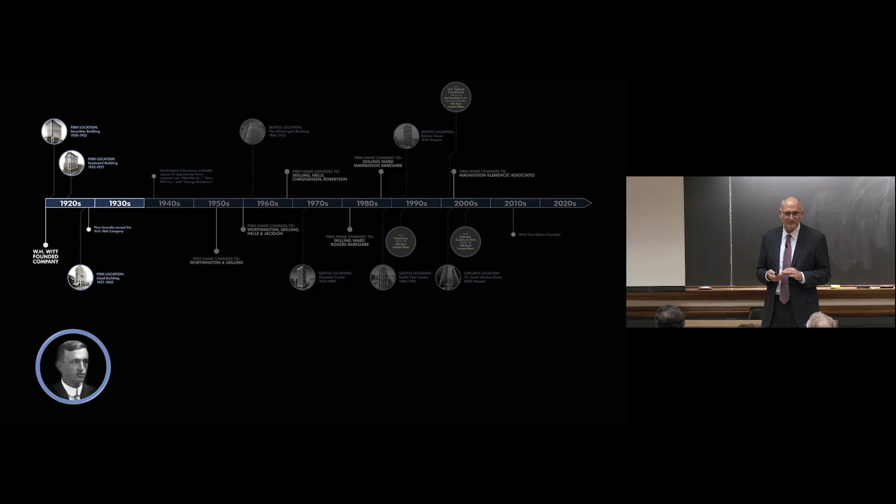A little bit of history, because I always think it's good to know history. When I was an undergraduate student, I got a minor in history because I thought history really teaches us good lessons. In my case, our company started in 1920 by a guy named William Witt, who was a structural engineering graduate of the University of Wisconsin. He migrated from Wisconsin to Seattle and established a company in 1920.

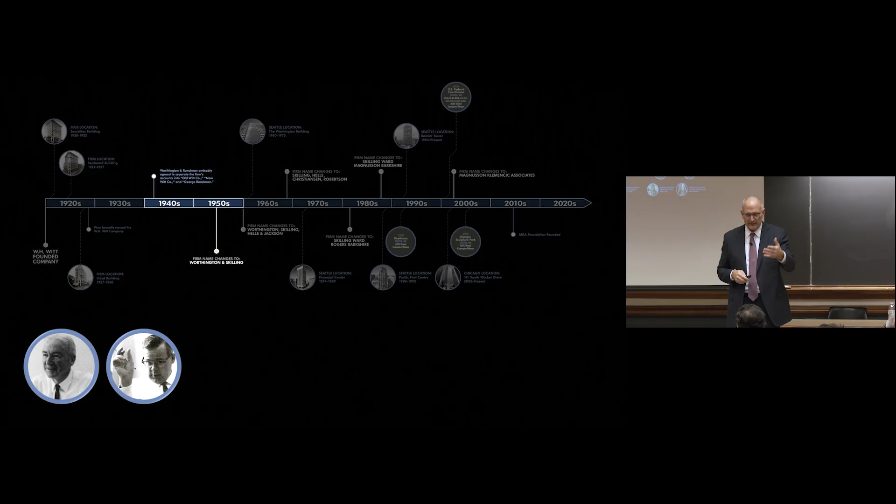He did a bunch of local buildings in the Seattle area and the Washington, northwest region of the US. In the 1940s and 50s, along came a guy named John Skilling. John Skilling is really the individual who laid the groundwork for our firm and really launched us into kind of what we are today. Most importantly, John Skilling's good friend and classmate at the University of Washington was Minoru Yamasaki. This is the beginning of that trust and that caring and that relationship between an architect and an engineer.

We'll talk about that a little bit more, but in the 50s they were doing a lot of thin shell concrete construction. And then along came in the 60s and 70s some really brilliant engineers that joined the company, in particular Jack Christiansen, who was a savant in concrete design, and Les Robertson, who's an absolutely brilliant structural engineer. They did all kinds of miraculous things in the 60s and 70s.

The World Trade Center towers in New York, the first diagrid building in Pittsburgh, the Federal Reserve Bank in Minneapolis - all across the country starting to work on these miraculous projects. A lot of it was an outgrowth of John Skilling and Minoru Yamasaki's friendship, and that trust and that collaboration.

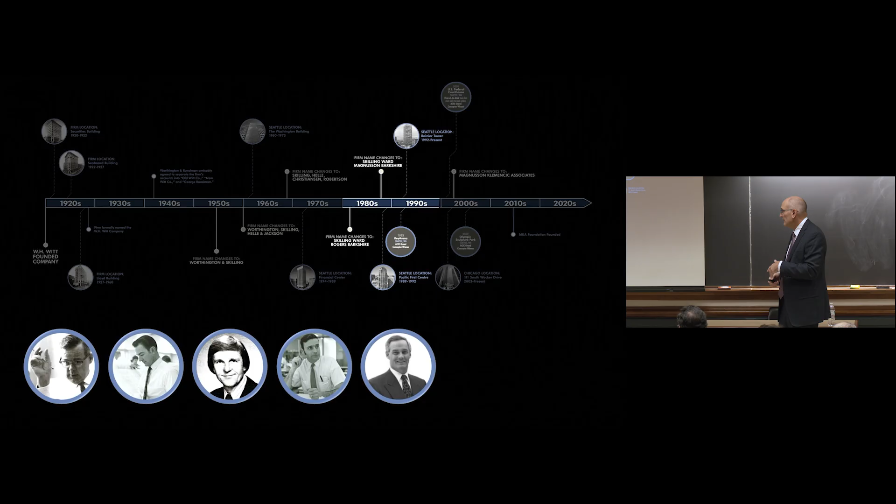And then along came a guy named John Magnusson in the early 80s. John led us into a new era of modern construction, modern buildings, composite construction, all kinds of new technology. And then around 2000, I came along, and here we are today. So that's our company history, but rooted in that, all the way back to the 1950s and 60s, was this relationship between the architect and the engineer and this collaboration.

So here's a building I want to highlight very briefly because it sets the table for things to come. This is a building that John Skilling and Minoru Yamasaki did together in Seattle. It happens to be where our offices are located, the Rainier Tower in Seattle. The idea Yama had was he wanted to take this building and raise it 12 stories in the air, because that got the building above all the surrounding buildings - at the time they were only 12 stories tall - and everyone would have a view of the water, which is a big deal in Seattle.

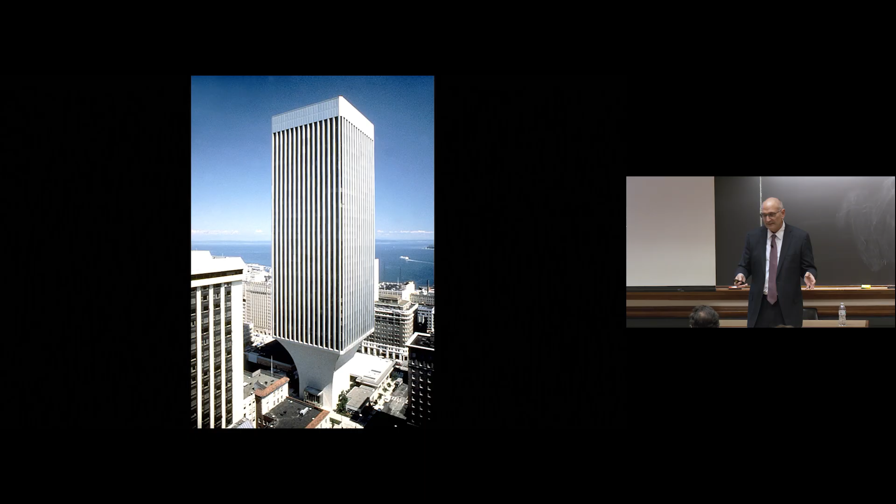And so we went to Skilling and said, well, how do we do that? Skilling came up with a couple of ideas, but ultimately they settled on this one, I'll call it the Rock of Gibraltar. Some people call it the golf tee. But put the building on a 12-story tall concrete pedestal, which is what the design ended up being. And what people don't really realize is above that Rock of Gibraltar is a very light steel structure, a steel moment frame structure that exists on top of it. At that time in the 1970s, that was a particular, popular way to go about designing the structure of tall buildings. We just happened to put it 12 stories in the air on top of this pedestal. But that was the kind of makings of that collaboration between the two.

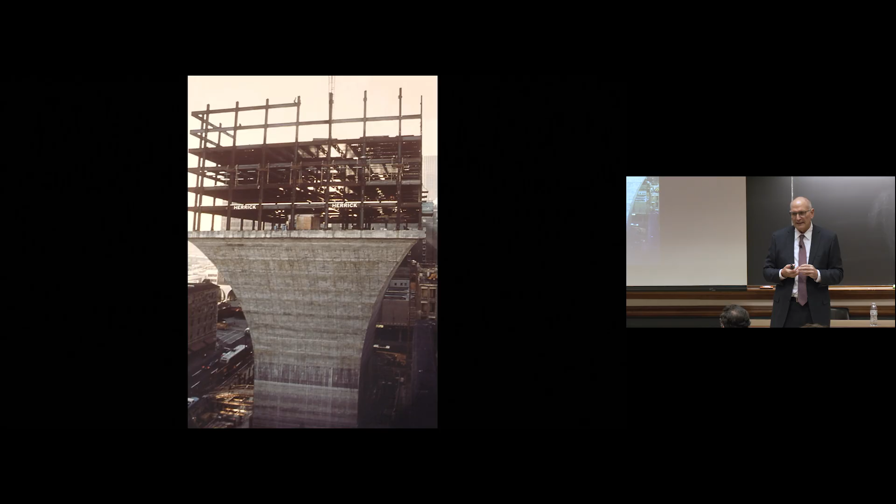I got the pleasure of actually working with John early in my career, and I asked him about this particular building. I said, you know, that was brilliant, this idea that you guys came up with. And he smiled and laughed. I said, what did you think about that? He said, well, yeah, I let Yama think it was his idea. Anyway, there it is under construction.

Well, that laid the groundwork for then almost 35, 40 years later, we got a call from John Buck in Chicago. Mr. Buck wanted us to design a building, which ultimately ended up being 111 South Wacker. But that was the beginnings of a relationship for me personally with Jim Goettsch.

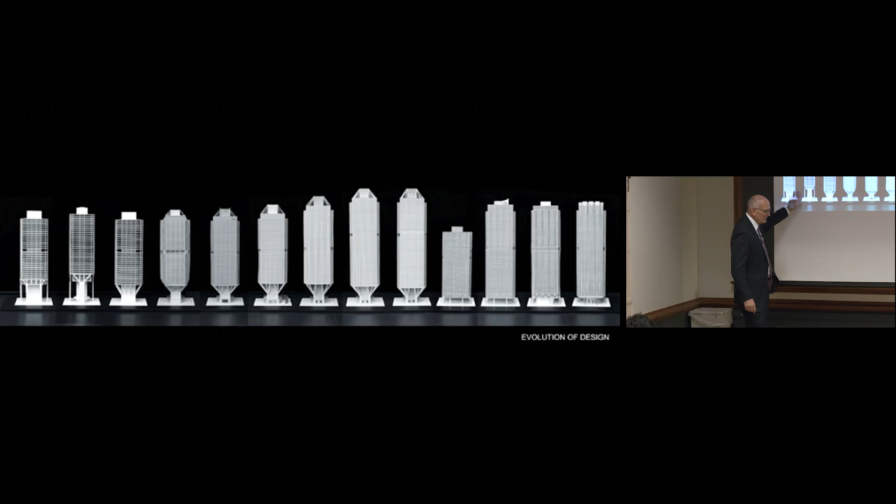And the idea back then was similar. Surrounding that site were buildings that were about 15 stories tall. So the first ideas that Jim and I came up with were, well, how do we raise the building 15 stories in the air? Jim came up with these first few models. And I said, well, wait a minute, we've already built this building. It exists in Seattle. We made it out of concrete, but this is Chicago. We need to make it out of steel. How do we do that?

So we started toying around with these kind of tree column ideas, these sloping columns. This is where Jim and I really kind of launched into our collaboration of how to best do a version of Rainier Square in Chicago, not in concrete, but in steel. And so we went along developing these different ideas until we got to here. The building had grown in height and gotten more bold, and the market was good.

And then right here, something happened, and the something was 9/11. So at that moment, the world stopped. In fact, many said there'll never be a high-rise building built ever again.

But about a year went by, and the phone rang again, and Buck said, okay, it's time to go again. But I can't build this building because that's too scary to people. You need to come up with something else. So the idea was, well, how do we still achieve that raise of the building, but have it appear less frightening to a public that was freaked out about tall buildings?

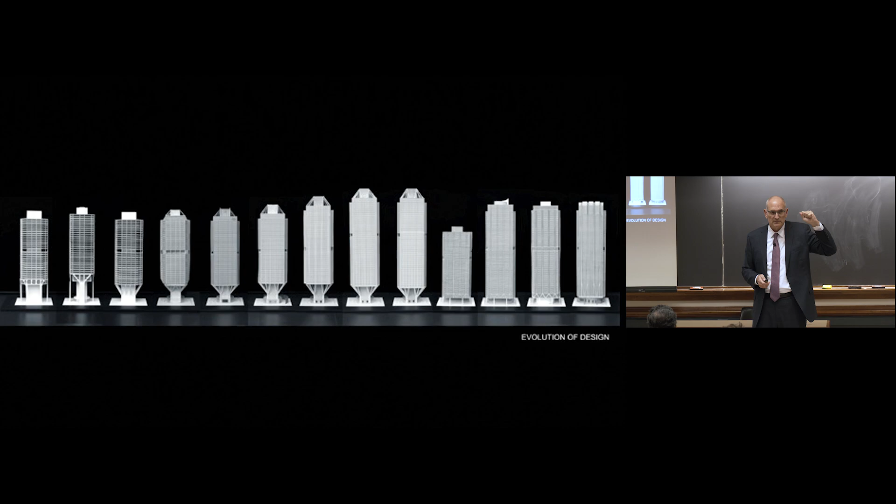So what we came up with ultimately is what we built on the right there. What you don't see is in these floors that used to be air, those floors now are actually all parking. So the first usable floor of that building is still at level 12, where people are actually residing in their offices, and everything below that is parking. The whole design response to the public sentiment at the time was we need to make it look more safe. How do we do it?

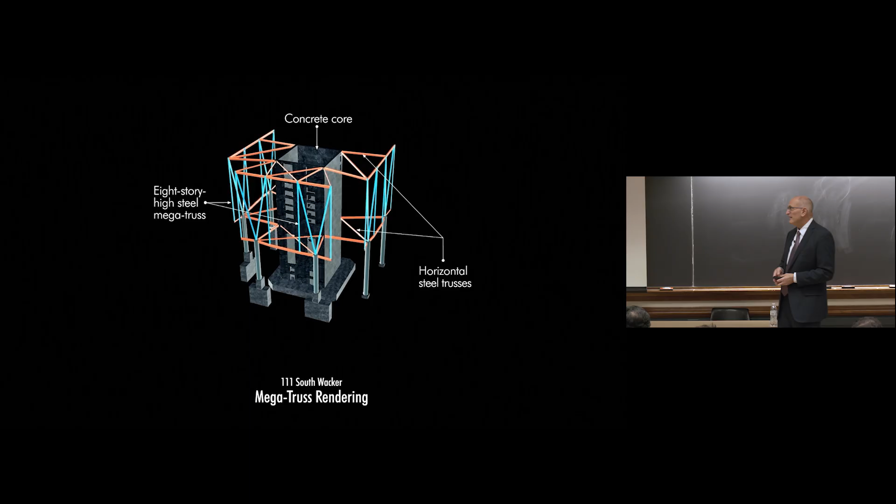Anyway, to the engineering, how we did the engineering was fairly simple. On each side of the building, there's 2 columns that touch the ground. On top of those columns that stand up about 80 feet in the air, there's this V column that goes up and splits out and grabs 2 more columns above. So we traded 2 columns above for 1 column below so that we touch the ground more delicately.

And here it is when we're building it. How you build these things becomes equally important to how you design them. So that collaboration then extends to the contractor. How are we going to actually make this? And so how this works, you see, here's one of those big columns that touches the ground, goes to here and splits into the V.

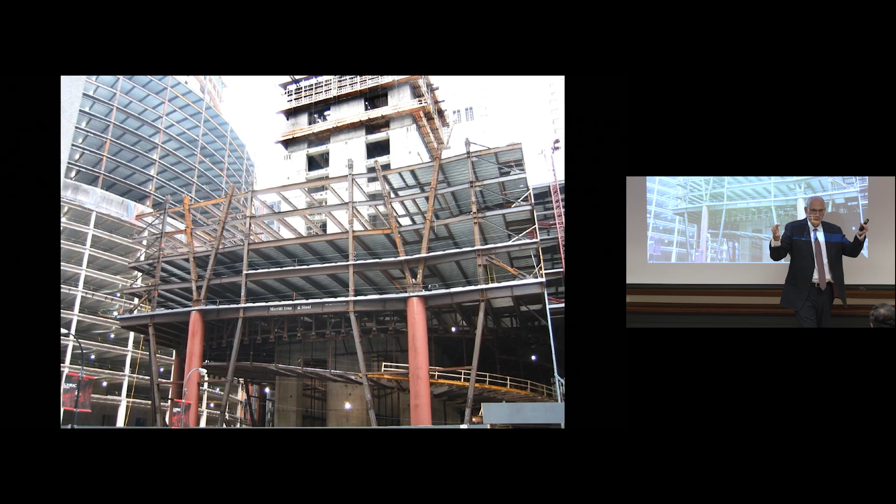The V goes all the way up to a point where it grabs a node, and then this column here is actually hanging from the top of the V. This piece here and this piece here are just temporary. We put them in temporarily so that we could build the building from the bottom up until we completed the top, and then we could take the column out.

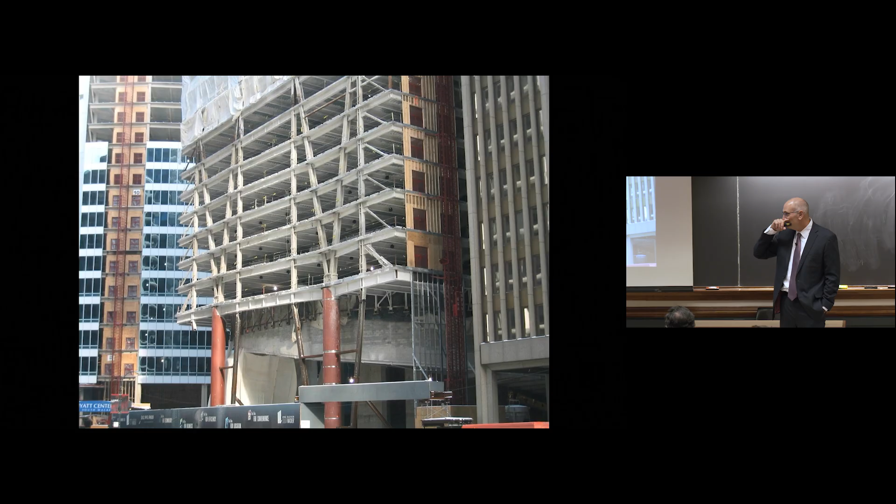So on one fateful Saturday morning, they said, Ron, come to the site and stand right there while we take that column out. This is your design. It should be safe, right? You stand there, we'll take the column out. So we did, and it worked. And it turns out to be a beautiful building.

We had this idea of raising the building up, getting up above something else, but we didn't really realize it in this building. We still ended up with these two columns on each side of the building because of the 9/11 response. But this idea was still kind of in our heads. This is another thing that happens with architects and engineers, we get on these themes, these tracks, these ideas, and until we perfect them, we'll kind of relentlessly pursue them.

So we had this idea one day about putting two towers on top of Union Station in Chicago. Union Station is a historic structure, historic architecture. You can't really touch it. But how do you take two office buildings and insert them somehow surgically through Union Station without mucking up the history of the building?

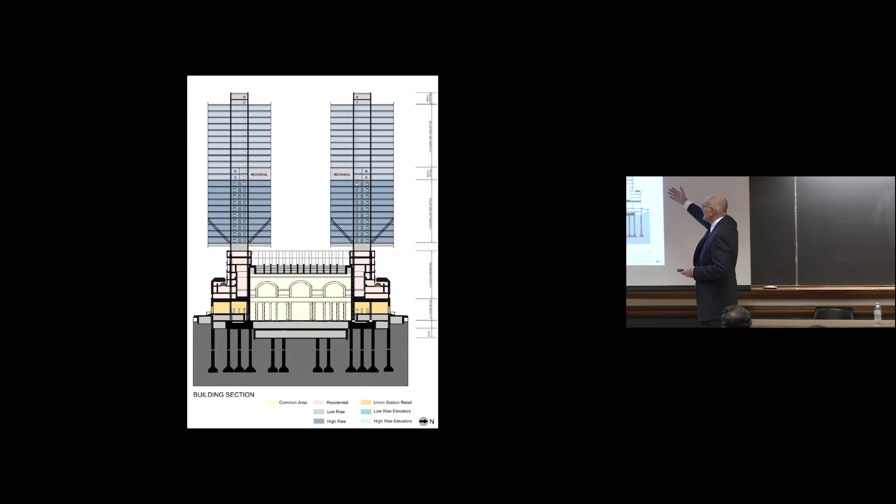So the idea was hatched again that we do something like we had thought of in the beginning. In this case, the tree column thing is buried in the building, and the building only goes through Union Station with its elevator core. No columns, nothing else would go through Union Station, just the elevator cores, because that's what needed to go there to get the people up and down. Anyway, it was a concept. We pitched it to a bunch of people. No takers. On to the next one.

So then we found some clients in Abu Dhabi. This is the Abu Dhabi Financial Center. So we actually got to build it on a smaller scale. This is kind of an experiment, but here we are. And we built it. It was only about half the size of what we had hoped, but it was actually realized in Abu Dhabi.

And then the big opportunity came: 150 North Riverside, the building right on the Chicago River. And this was not designed for what I like to use the term architectural conceit. This is architecture for a reason. And the reason was the site was right on the river.

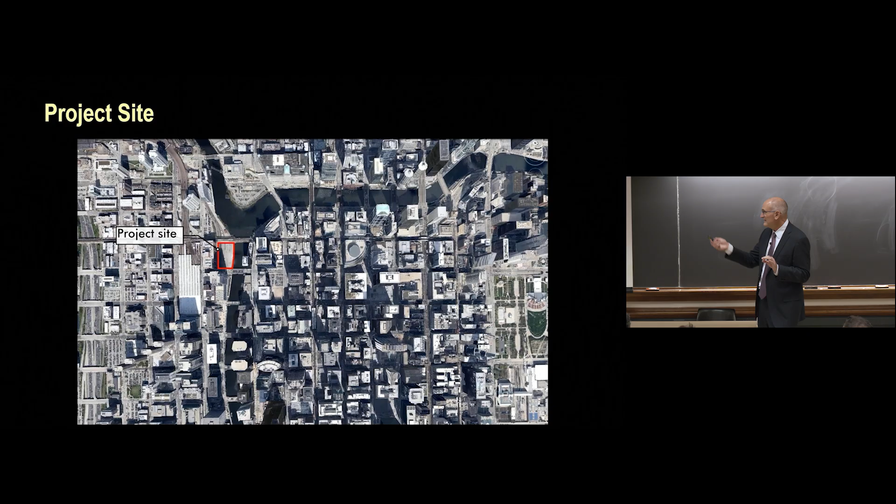It was covered with railroad tracks, and we had to put this blue shaded thing, which is the building, on top of all the inbound railroad tracks that were operating, and we couldn't touch the tracks at all. So how do you put this building that wants to be in this position over the top of all those railroad tracks without putting foundations and columns and things in the way?

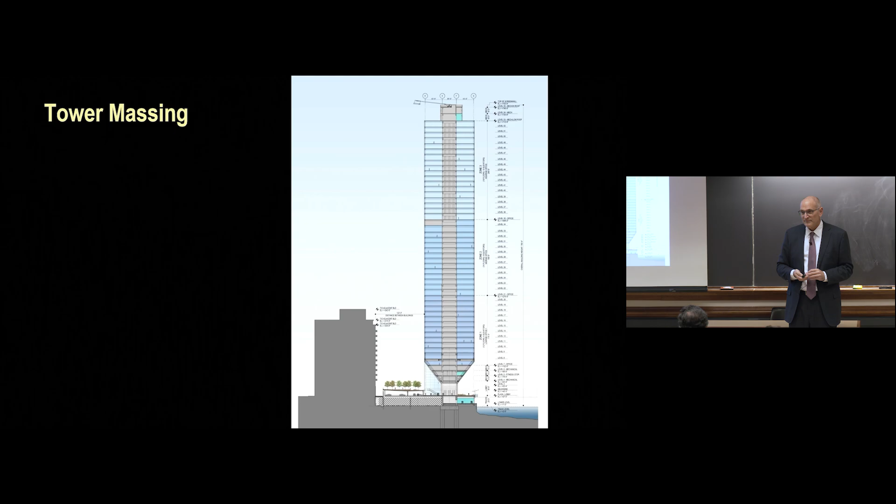So we hatched this idea again. We pulled it out of the drawer, said this is the time that we're going to live the big dream right now. So we're going to create this very tall tower, and we'll have it only touch the ground with the core. We're going back to our tree column or sloping column idea, and we're only going to touch the ground with the core.

Now, normally a building that tall, for the wind loads in Chicago, for the sway of the tower, we need to put in something engineers would call outriggers. The outrigger is a lot like the ski poles for a skier. You can imagine if you're a snow skier, if you don't have your poles and you stand on your skis, you're a little wobbly. As soon as you put your poles out here, you're a lot more stable. Same thing with a building. When you put these two columns out here and put these trusses, which are like arms reaching out to the poles, it stabilizes the building much more.

Well, if we did that here, the column, or the ski pole if you will, would be in the middle of the railroad tracks. Can't do that. And the other one would be in the river. Can't do that. Oh my goodness, now what are we going to do?

Because the client really wants to build a building this tall. The other thing that structural engineers will note is that we use this term aspect ratio. And the aspect ratio is the height of the tower divided by the width of the base.

And it's not just the width of the base, it's the width of the base of the building that braces the tower. So in this case, we were going to have this tower, something like 700 feet tall, on top of something that's only 39 feet wide. That's a 20-to-1 aspect ratio, 700 feet divided by 39 feet.

Now, if you go into a structural engineering college textbook on high-rise design, they'll tell you that the normal target aspect ratio for a good design is 8-to-1. That's kind of boring. 10-to-1, okay, I might need to think about it for a minute. 12-to-1, I might turn my computer on and actually run some analyses. 15-to-1, I've made the cover of a magazine somewhere, because that's really slender. This building was 20-to-1. Never been done before.

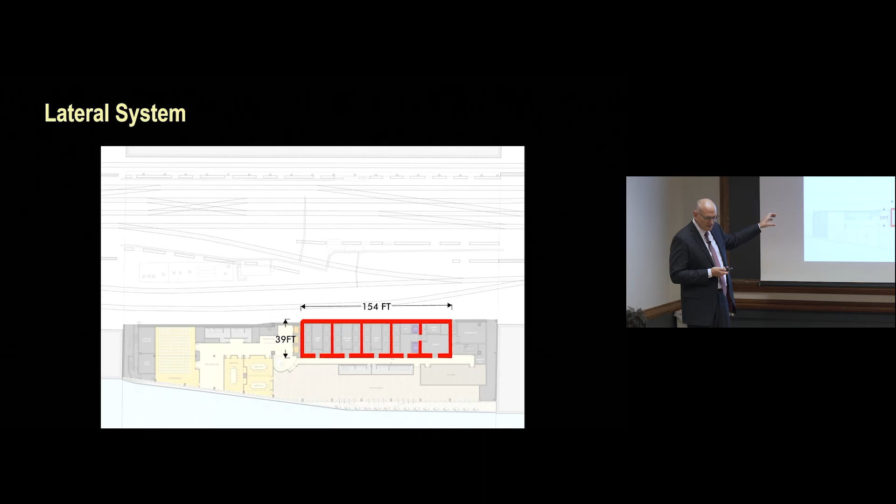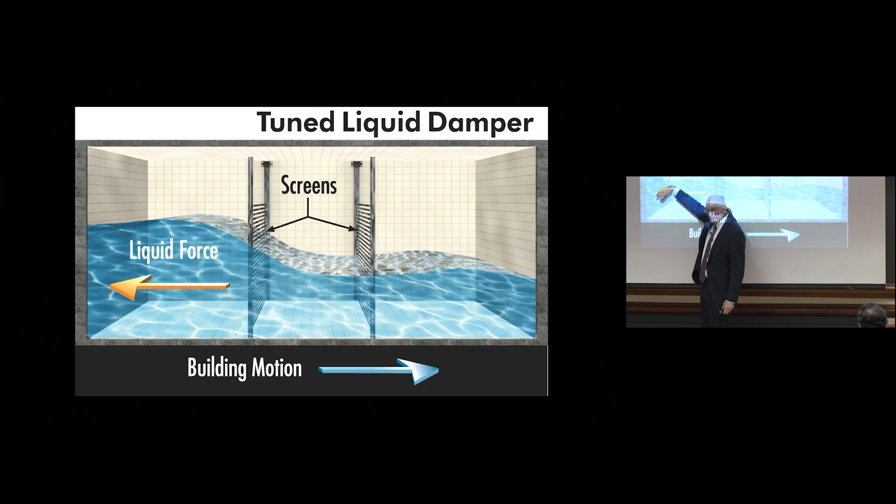In this diagram, you see something that engineers will know, we call it unbalanced hydrostatic force, meaning the water on this side of the tank is deeper than the water on this side of the tank. What that means is the force on that wall is a little bit bigger than the force on that wall. That's due to the sloshing of the water in the tank.

So the idea was if you can design the size of the tank and the amount of water in the tank so that as it sloshes back and forth, it counteracts the natural sway of the building. So they kind of go like this, they cancel each other out and the building rests very quietly. It actually works.

You have a question? How much water was needed for this to happen? A lot. I don't remember the exact number, but I think it was 120,000 gallons. Not a trivial amount of water. But that's the science of it.

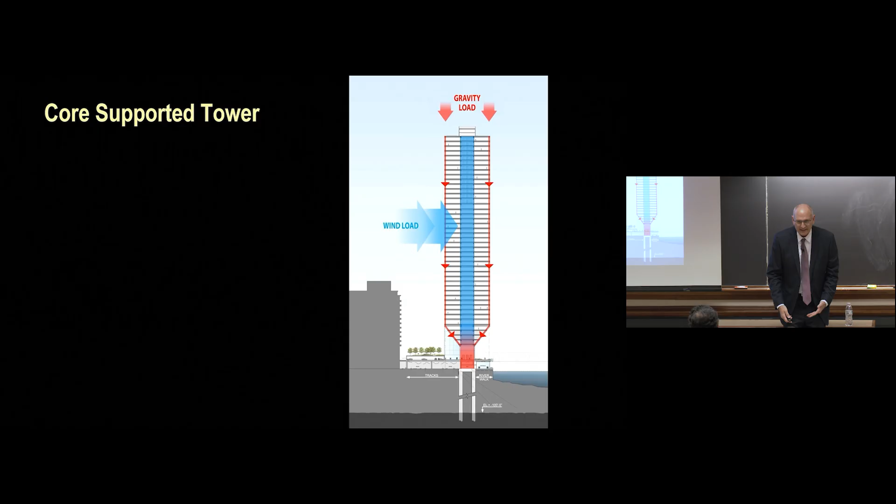The other part was, how do we manage the gravity forces in this building? Down the outside of the building are the columns, but they all need to get into the core somehow. So how we did that is we built what's amounting here to an upside down arch. Think about the St. Louis arch. Our arches are really good in compression, but they can be equally good in tension the other way with a tie. So this is a tied arch upside down. Here's what it looks like in section.

The blue things are part of the tied arch, and these are the pieces. So this is not for the faint of heart. This is where that sloping column comes into the vertical piece. And they're not small pieces, right? These aren't tinker toys we're playing with.

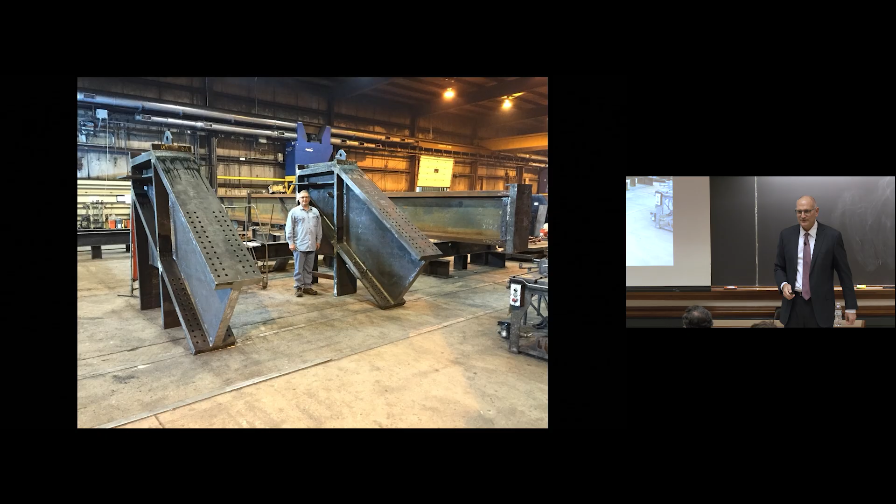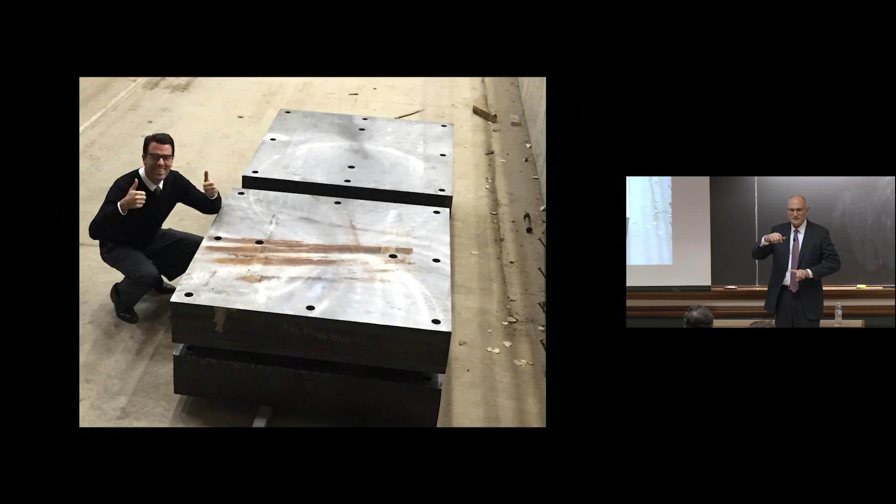These are life-size, real pieces of steel. Those are the two largest steel sections that they make in the world, and we were putting them together side by side to double them up. Very significant pieces of steel. And those are the base plates for the columns too, 12 inches thick steel base plates. So for structural engineers, this is like, love this stuff.

All right, so we built the building. It was very cool, it was very fun. They built it from a crane on the river. And that was that building.

So we're going to move on, and now we're going to talk a little bit about my friendship with Jeanne Gang. Jeanne, University of Illinois graduate, was actually contemporaries with my business partner, Dave Ekman, who runs our Chicago office. Anyway, we do a lot of work with Jeanne. She's very brilliant, and we have lots of fun together. But again, back to that trust and that caring, the architects have a big idea, the engineers have to have a big idea too, to complement it. That's where the magic comes.

All right, so here's the Aqua building in Chicago. There's Jeanne in her office, she gets down and dirty, man, she's climbing around the furniture. In this case, you see the first of about 500 strings that she strung from that building. And the idea, one of the ideas was she wanted people in the building that when they're on their balcony, they all have a great view.

They can see around the adjacent buildings. So a lot of why the building's shaped the way it is, where it's further out, where it's less far out, is influenced by the views around all the adjacent buildings, as she discovered when she was with her strings in her studio. That was in her backyard. We built a big model. And this is me toying with my own models.

So the big idea was we wanted this crazy squiggly slab edge. So you're looking in plan view at a floor. Every slab edge for 80 some odd stories is different. Every edge is different.

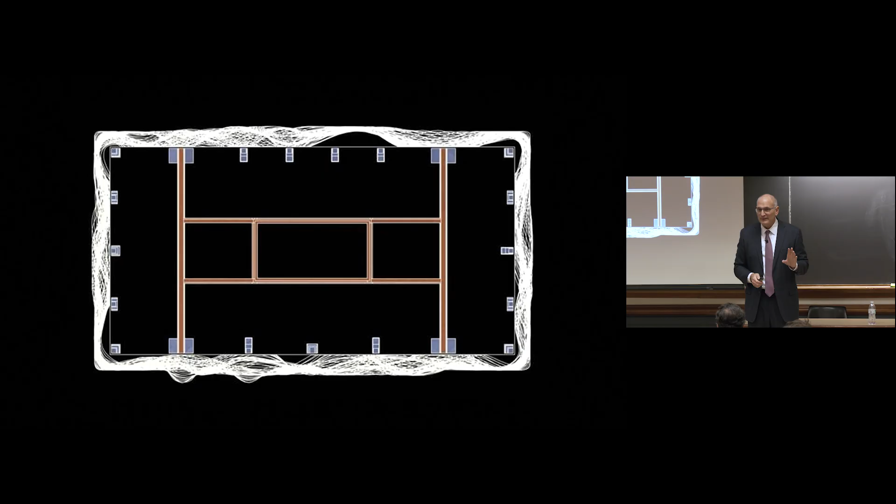But inside that is the most simple rectangular box that you can possibly imagine. What you see here, these red things, are part of this system that braces the building for wind. Otherwise, it's a very simple rectangle. It's almost the simplest structure we could possibly imagine for a building of this tall. It looks incredibly brilliant and complicated, but it's actually incredibly simple.

So there it is, a little bit better view. Every floor slab is different, but the structure that you see there, the red and the blue, it's the same all the way up. And it's basically a rectangular box.

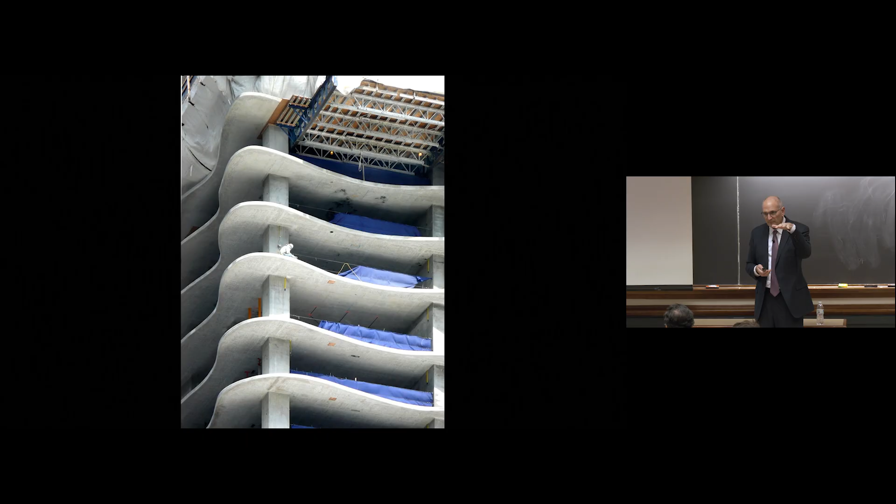Building the slab edges was the trick here. So here we have the architect, the engineer, and again, we got to collaborate with our contractor friend. How do we build the slab edges? So for this building, we actually helped design a new kind of formwork system to form the slabs and allow our cantilevers to be more aggressive.

And then the slab edge form itself was a bit of an experiment, because every floor being different, we wanted to be able to lay it out very quickly and then reuse it. So we came up with a piece of steel with just the right thickness that would hold the wet concrete when it's being cast. But then after the concrete's cast, you could take it off. It would spring back to straight, and you could reuse the piece on the next floor.

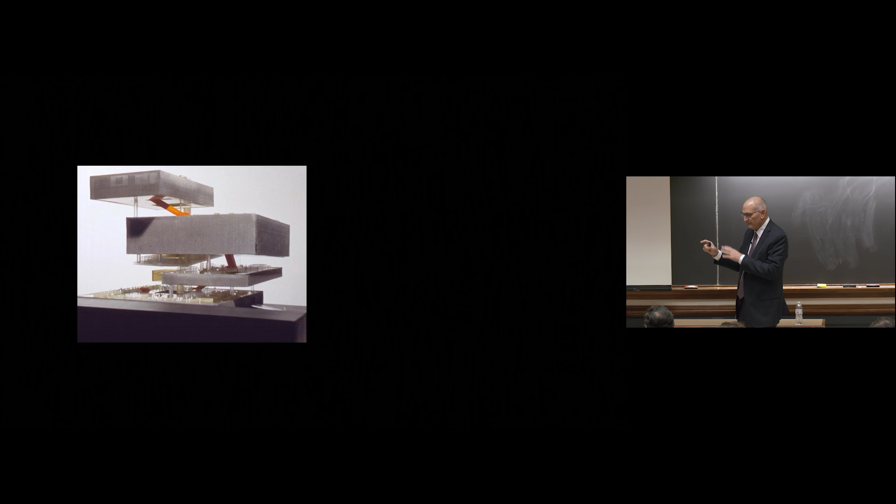And that was that building. So I'm going to switch now to a whole nother set of buildings, not high-rise buildings, but now some lower-rise buildings, with another friend architect, which we have a great collaboration with, a guy named Joshua Prince-Ramus.

There's a company called Rex in New York. Josh, at the time, was a protege of Rem Koolhaas. This is the Seattle Library that we designed together with Rem, but Josh was really the guy who did the work. So there's the model from OMA in the beginning. That's what we built. They've got some similarity to each other.

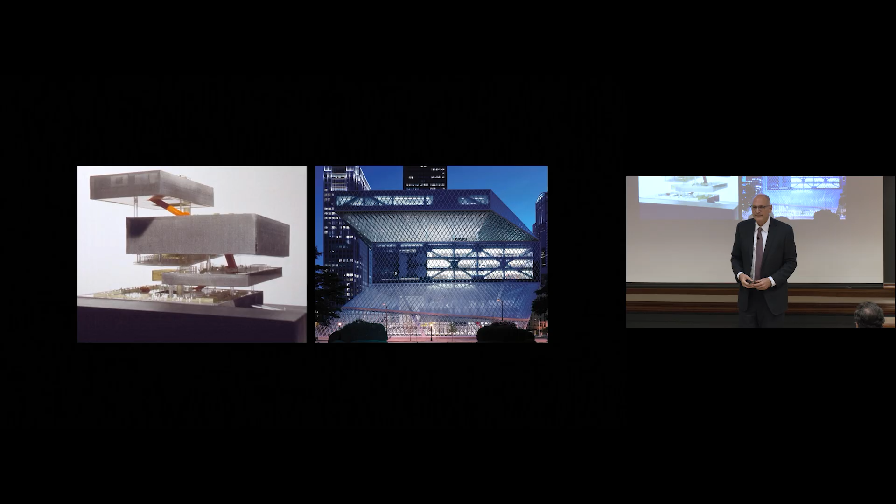But the big structural idea was, okay, that wacky building, how do you hold that up? Rem and Josh came to our office with this model and said, here it is, figure it out. And so again, now you're faced with that. The structural engineer has to come up with a big idea. Well, what's your big idea?

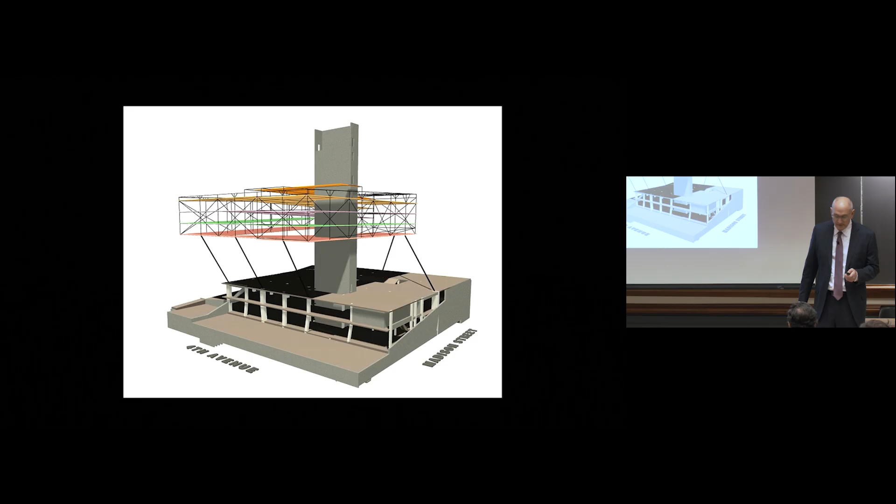And so the big idea was this idea of a belt. A belt that holds up your pants. In this case, we were going to build this belt truss, these couple of floors here in the middle, that would hold everything below it and hold everything above it. And so that belt hangs several floors below it, and it posts up several floors above it. That was the big idea for this building, was we were going to have this belt structure in the middle and then work off of that belt up and down.

In the end of the day, it's gorgeous space. If you happen to get to Seattle, I invite you to go there. It's open to the public. It's the public library. And if you get that opportunity to walk into the main reading room, you'll go - all you architect students, you'll go, oh, this is good. It's very much like a cathedral. It's a very, very fantastic space to be in.

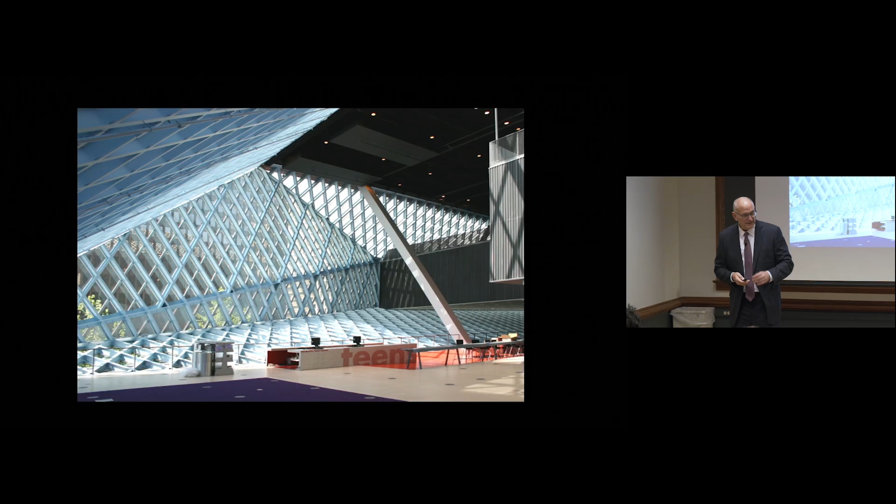There's many, many, many more stories about that building. That's for another lecture. But with Josh, he broke off on his own, and we started doing other projects together. He formed Rex, which is his company today. And we did this project in Dallas, Texas, the Wyly Theater.

And so this was an interesting assignment in that the theater wanted to build a new facility, but they had this tiny little parcel of land. And they needed to somehow fit their entire program on what was this tiny little parcel. So how do you do that?

And so Josh's big idea was, well, we'll take what was the normal arrangement of how you normally build a theater, where there's the front of the house, there's the performance chamber of the theater, and then there's the back of house. And there's a fly loft for the scenery and what have you. We'll take that whole concept, which is normal, and instead we'll stack it, and we'll put one on top of the other. And we're going to fit all of this program and this entire concept on this little postage stamp site. That was like the big idea, architecturally.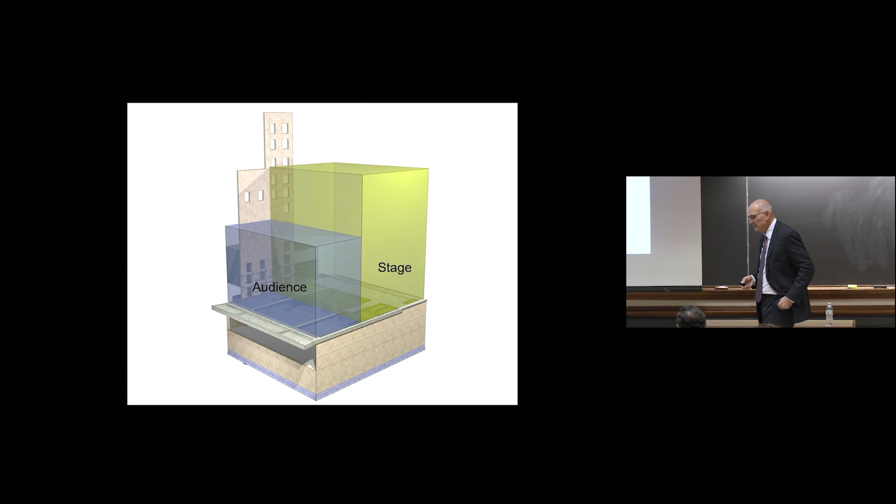And this is where the back and forth begins with Josh and the teams collaborating. So there's what we want to do, and we went back to what? Our belt truss. So we're going to use that same thing we just did on the Seattle Library. We're going to use that idea again, because it worked pretty good. But we got to hold up the belt truss somehow. We got to put some columns in. So we put 4 columns in.

That's all simple enough. And we showed this to Josh, and he goes, yeah, hate it. What else you got? Because one of the other aspirations of the architecture was kind of opening up the ground plane as much as possible, which we thought we did, right? It's wide open here.

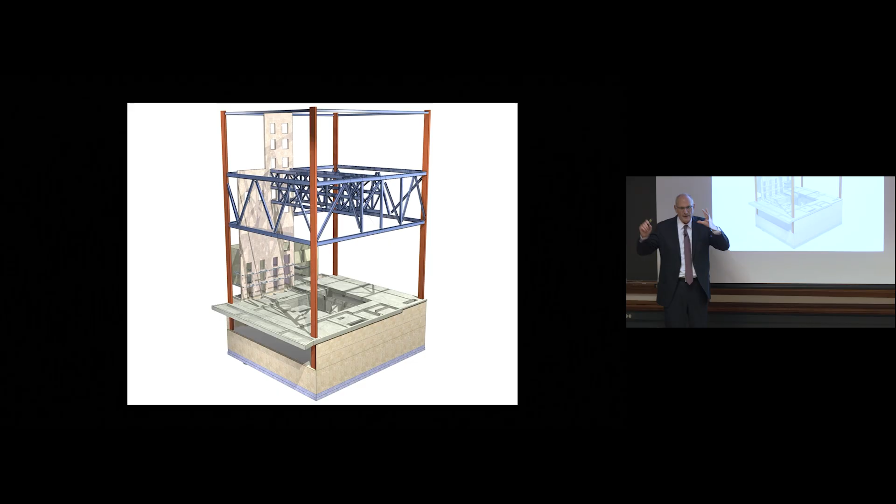But what we fail to recognize is the main view of the city is on the diagonal back here. And that comes smack dab in the middle of the main view back to the Dallas downtown.

We also had to brace the building. So this is a structural engineer's view of, well, that's how you brace it. You put some big diagonals in, and yeah, Josh, yeah, I hate it. What else you got? Well, we'll move the columns away from the corner, and we'll brace them. Yup. Nope. Not good enough.

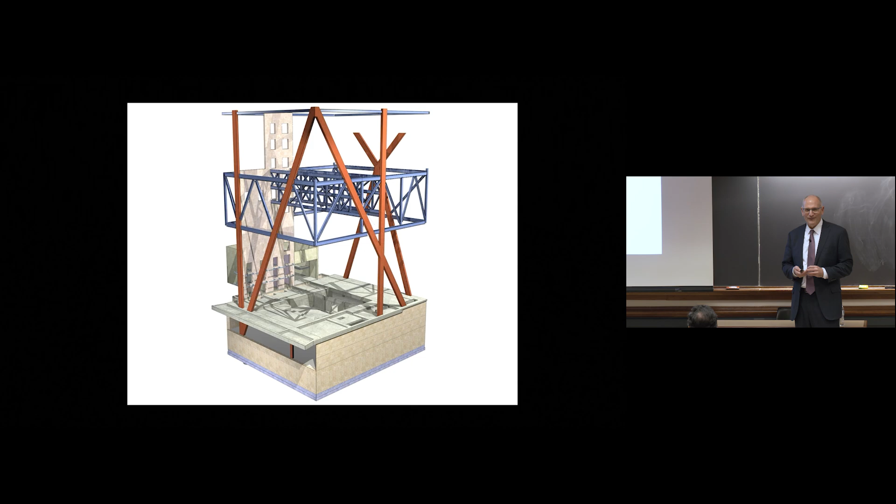Try again. We'll move them further away from the corner. What else do you want? And we'll brace it. No, still not doing it for me. How about if we start sloping them? Ooh, we're getting warmer. I'm starting to feel it now. Oh, how about more? I love it. Yeah, this is good.

Touchdown. Go build it. So this is the model. That's what we built.

So that was this very small encapsulation of what was months of back and forth, lots of bottles of wine consumed, and lots of fun sketching.

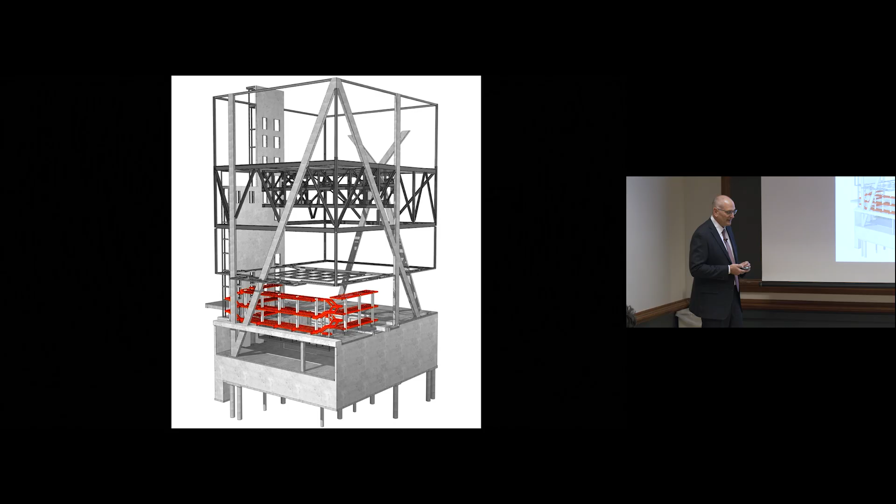The other big idea that Josh hatched in this project, which was a first for us, was something like movable seating. Because this was a very tight footprint, but yet they had all these different ideas on how they wanted to use the building, Josh had this idea—I think he just seen the movie Transformers, where the car turns into the robot and takes over the world. Well, this building is a transformer in the sense that you can manipulate the stages and the seating.

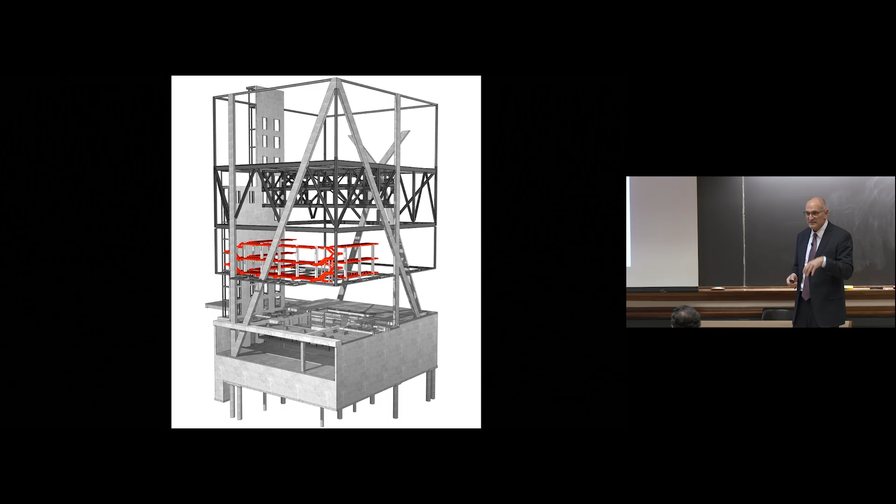So you begin to see those red things are seating tiers that raise and lower on hydraulics, so they can reconfigure the theater. There, we built it. And then we said, well, let's extend that, and we hang them up above. So we got this big flat floor now, and we hung the seating up there, and we're going to stuff some down in the basement. We'll put it all on hydraulics, and we'll move it around to reconfigure into these other seating configurations.

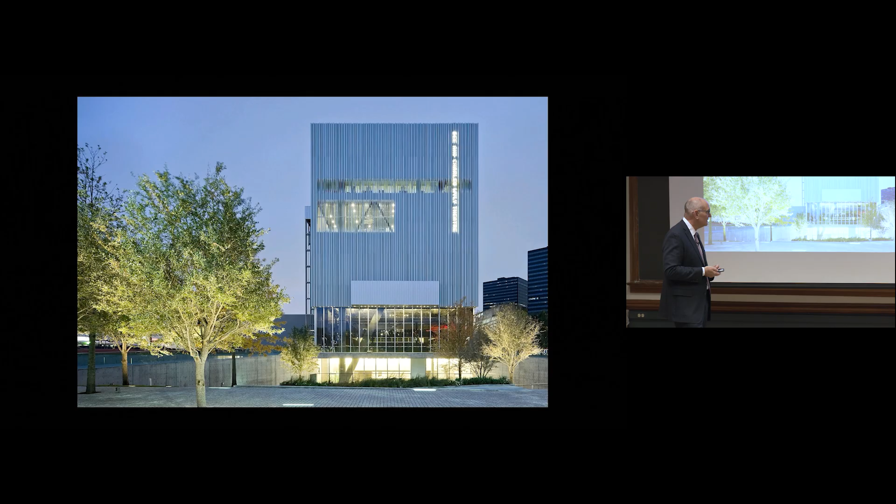And so this building, that's what got built—this notion of the transformer, and how do you actually realize that in real life. The building's absolutely beautiful. So once again, if you're in the Dallas area and you have a moment, go there, and you'll go, I know why you told me to come here. It's beautiful.

Back to Jeanne. Jeanne's, one of her big inspirations is nature. The Aqua Tower—not only the views, but the kind of erosion of that building—has its roots in her interpretation of the Wisconsin shoreline along the northern side of Lake Michigan, the northwestern side of Lake Michigan.

And so for this building, she had another natural inspiration, which was crystal. So we'll take this crystalline form, and now let's turn it into some architecture. She started toying around with different shapes and how to stack the shapes to come up with some kind of vocabulary here, some kind of idea of what the architecture might be.

Meanwhile, we had that meeting, and she showed us the crystal, and she showed us these things, and we go, okay, let's go do some math and science, because that's what we do. We love it when we can describe what seem to be complicated shapes with math formulas, because then we know how to analyze things and we can rationalize them, and it makes us feel good because we can do smart math. So that shape is actually technically called a frustum—it's the actual name of it. It's a truncated pyramid in layman's terms.

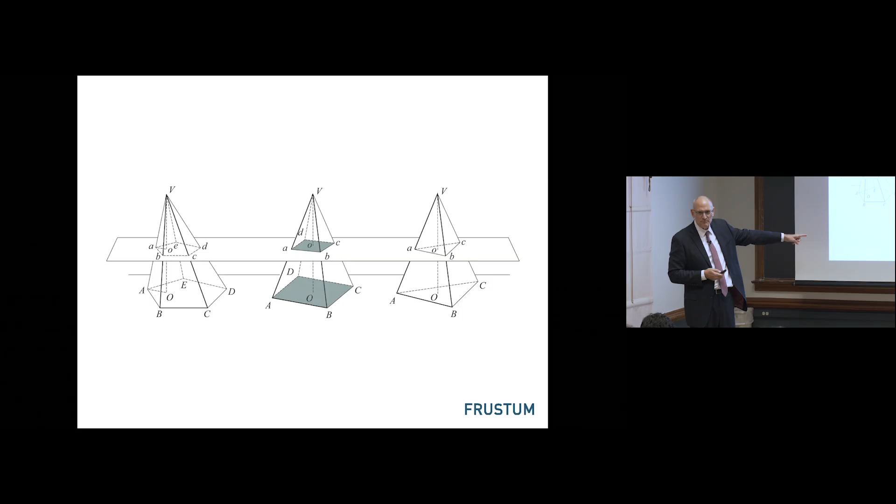So we said, okay, these frustums, things that you want to stack up and make this building—it's a residential building that on its lower levels looks like this, and then it terraces back again, and then at the very top it's very tiny. And here's this frustum shape, fine, we're going to do this.

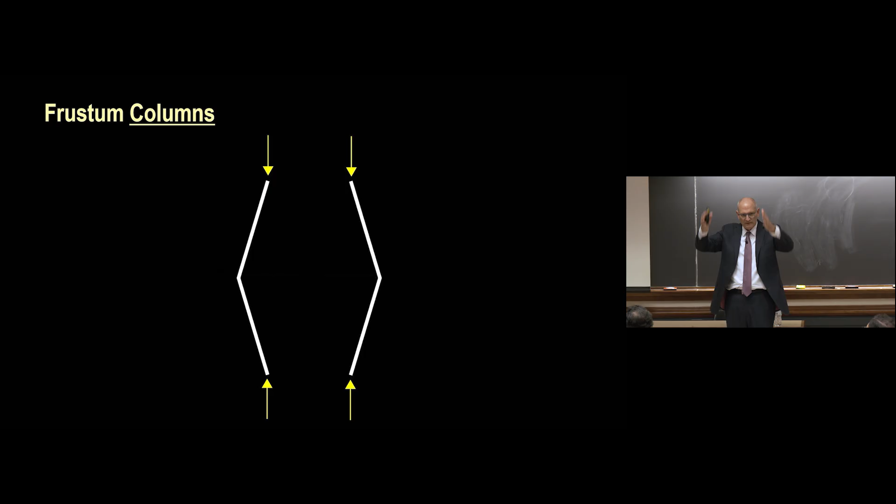But from an engineering point of view, we've got to still deal with these loads that come down, the columns. And the columns are now kinked, they're not vertical. Well, how do you do that? Because when the column kinks, there's this other force that develops—it wants to burst in this case. Well, that's not good. Or vice versa, when the columns kink the other way, the force is a compression force, and it wants to crush itself. How do we deal with that?

And then lastly, the floor slabs themselves have loading on them, and the floor slabs want to deflect. So structural engineers, one thing we are frightened of is something called buckling. When you have something in flexural curvature like this, and then you push on it, it wants to buckle even more—this is really a bad day. So these were the challenges with that shape, and we started to think about what are the solutions to that.

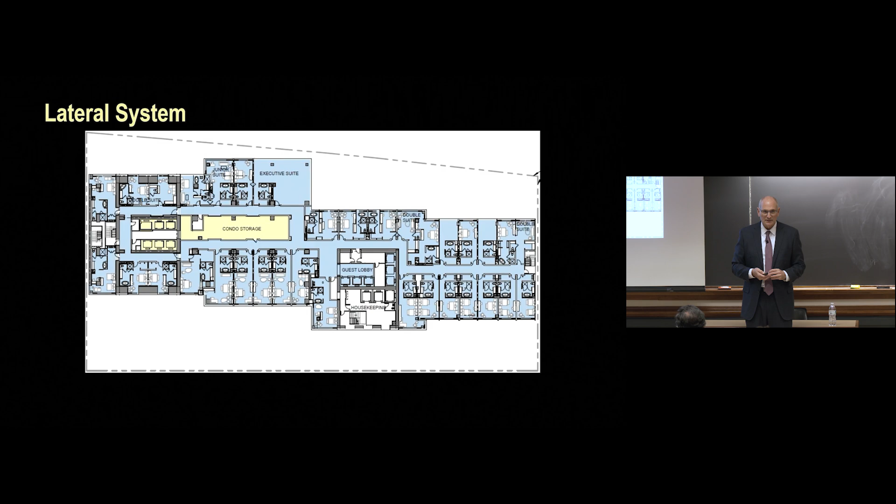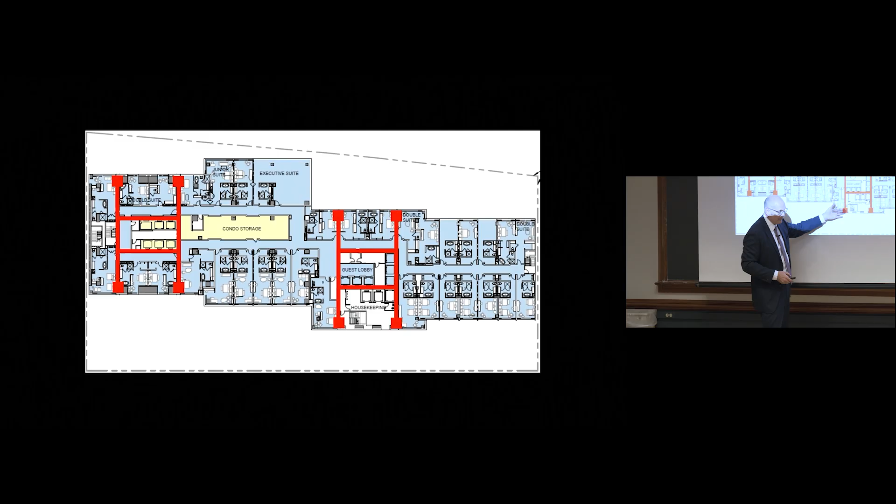And of course, it's Chicago, and we've got to deal with the wind—so how do we brace this building for the wind? We said, well, normally we put concrete around elevator shafts, we'll put some cores in them. But that's not enough for this building that's this tall, so we'll supplement those cores with these—we'll call them buttress walls. These buttress walls, in plan view, the red things, extend out from the cores, and we'll put these big blobs on the end of them to make them really strong.

And then that's not enough either, so we connect them together. Now we have a system, I'll call it a structural big idea. It's very clean, very tidy, very efficient.

We showed this to Jeanne, and we showed it in particular to our client, and what again? They hated it. In particular, what the client didn't like were these big blobs, because they got in the way of how to lay out the furniture in the residential units, how the curtains wanted to work, and how the views wanted to work. What else do you have?

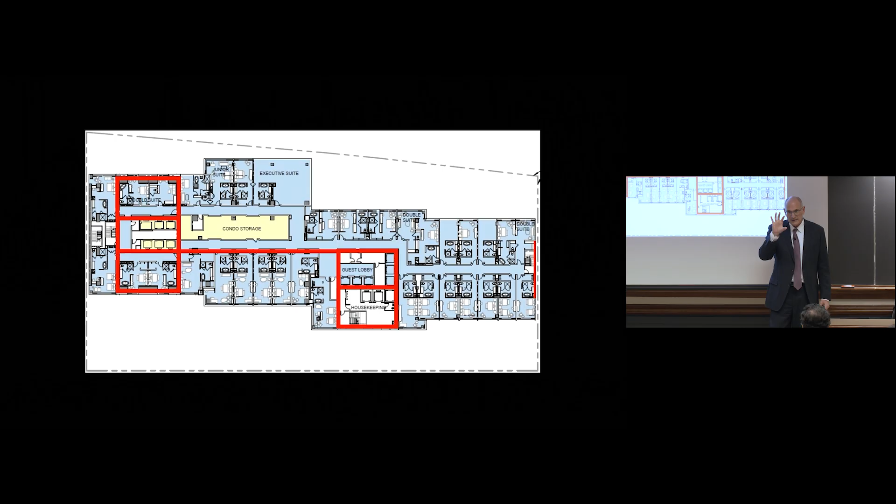So the response was, well, we'll get rid of the blobs, and instead we'll just make it a couple of boxes. We'll smooth this out, get rid of the big blobs, and then we'll poke holes in this wall for the windows. Everybody was happy, and that's what we built. So here it is in section.

Now, along the way, here's a funny story a lot of people don't know. So when we started the building, it had the frustum shape, like this, like this, like this, like this. It had a certain slope to it.

The client again said, I don't like the slope, because the apartment unit on this floor is too different than the apartment unit on this floor, so all the internal design is different. So what I want you to do is take that and make the frustum less of a frustum - not quite vertical, but less sloped than when we started.

Now fine, but the problem that created was: when we had the steeper angles and the wind blew on the building, those steep angles actually helped reduce the wind response of the building. As the building gets closer and closer to vertical, the wind response goes way, way up - it acts a lot more like a chimney.

Yep, it says so in the college textbook. Yep, that's what happened. So when we went like this, we had to go back into the wind tunnel.

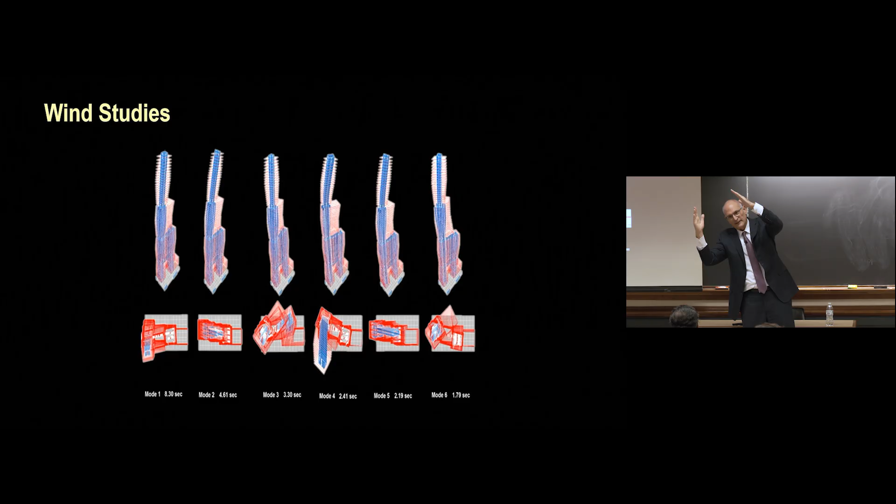Let's just say the overturning of the building in the wind, when we designed it originally, let's call it 100. And then when we changed the slope, it was 150. That wasn't so good. So how do we solve that problem and get us back to where we want to be?

So we went in the wind tunnel and started testing variants of the building. Myself, Jeanne, Mark her husband, their staff - we were in the wind tunnel with the wind tunnel people figuring it out. Here's our baseline model.

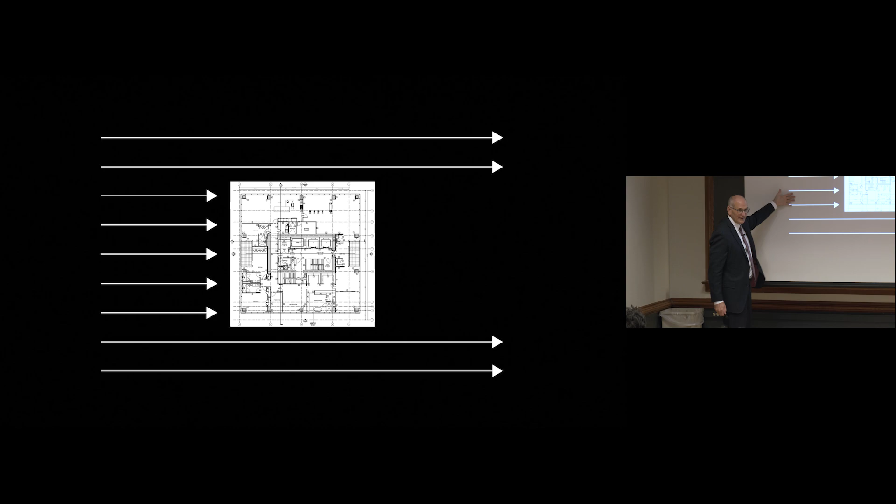We're going to deal with this stuff called vortex shedding. What happens is the wind is blowing this way, and as it comes around the building, these little eddies are formed, and the wind breaks off the building as it flows around it. The problem is that if those little green eddies break off the building at just the wrong rate, the building sways that way.

Kind of counterintuitive, but the wind's blowing this way, and instead of the building swaying back and forth this way, it's actually swaying back and forth that way - which we call the dynamic amplification, or dynamic response, or crosswind effect. There's a lot of names for it. But in tall buildings, it's a particularly bad thing we try to avoid.

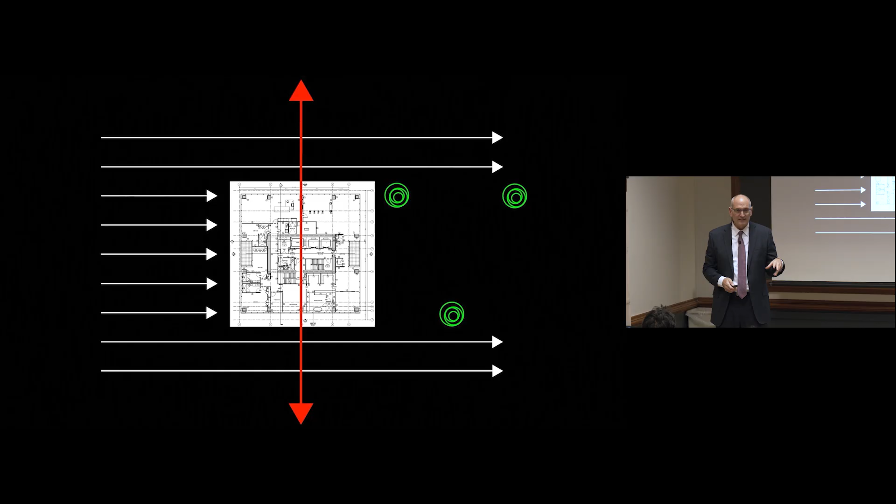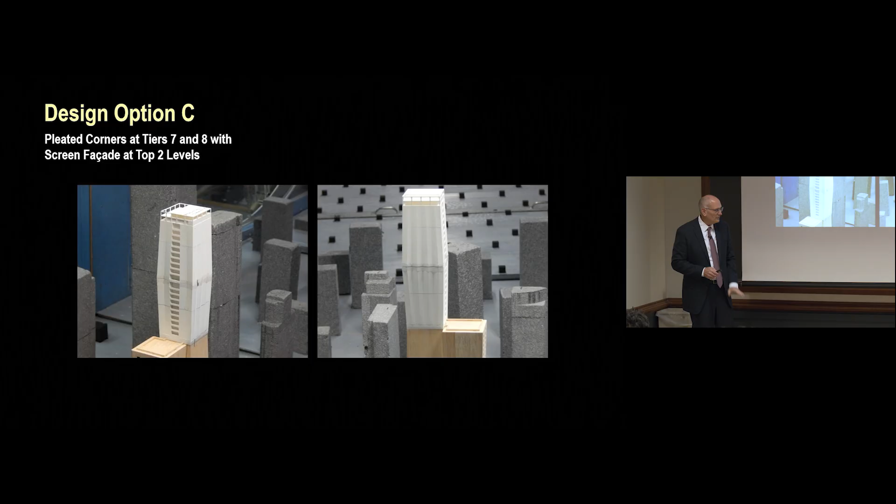That was an attempt to confuse the wind, make some roughness, make the wind load go down. We combined them together and did countless iterations of different things we might do, and then we plotted them all. So here's where we started, 100.

When we put the porosity in the top of the building, the screen wall at the very top, we went from 100 to 85. This has a screen wall, a screen wall, a screen wall, and a screen wall. This is some variation of crinkled side, eroded corner, all kinds of facade tricks. None of them really worked. The only thing that was effective here was making the top of the building porous.

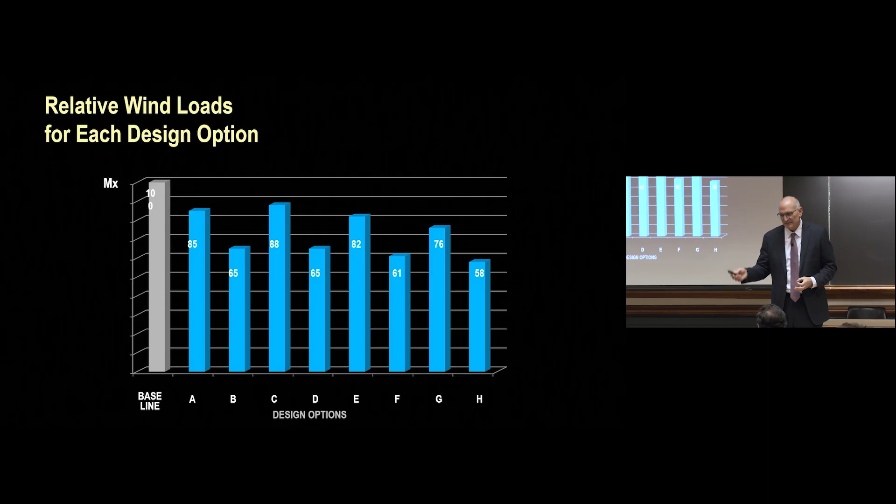And then we put the blow-through floor in that you see on the skyline now, kind of the gap in the building. That got us to 65. We went from 100 to 65, mostly through the blow-through floor. That was the solution, but it was almost trial and error between the architects, the engineers, and the wind tunnel to figure out how to get back from what was happening — remember people getting sick in the building?

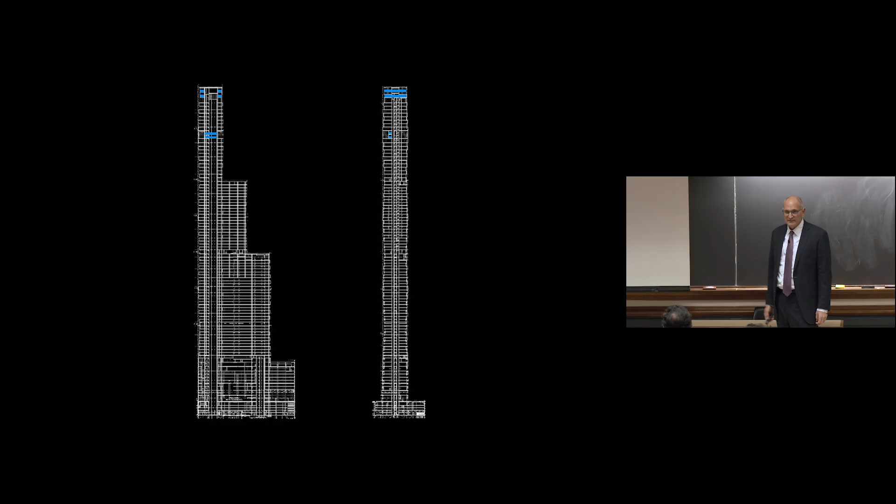So the other thing we did in this building — again, we like this liquid mass damper, it's really easy to build — we put another one in this building. At the very top of the building there's actually 4 tanks, and about 10% of the way down the tower there's another 2 tanks in plan view. Again, very large. How much water? A lot. There's a smaller tank too, but those things help settle the building down and sway.

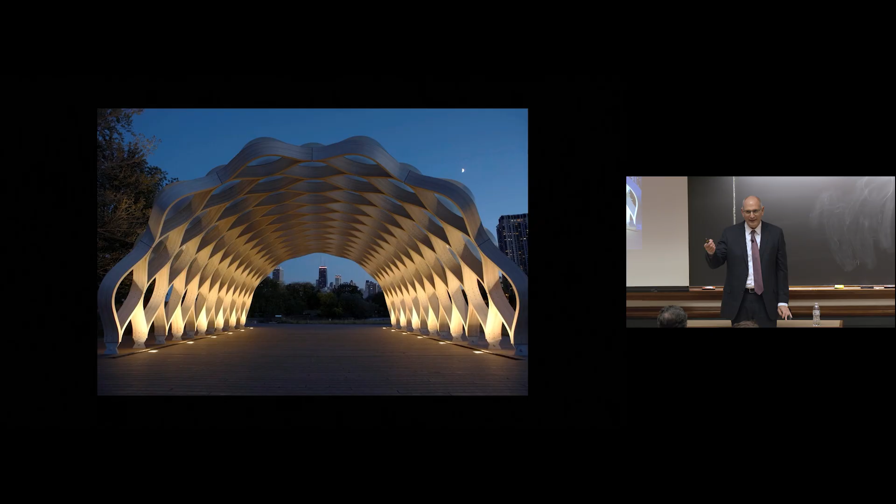Jeanne, once again, on a much smaller scale, right? We went from the 3rd tallest building in Chicago to a 1-story building in Chicago. This is my favorite project of all time. I'm a tall buildings guy. People around the world call me up because I'm the tall buildings guy. This is my favorite project.

And why is it my favorite project? Because the people we got to work with on this project were so fun and so brilliant and so creative that the process of actually figuring it out was all the fun. So this is in Lincoln Park, north side of Chicago. You can go there. This was Jeanne's original diagram.

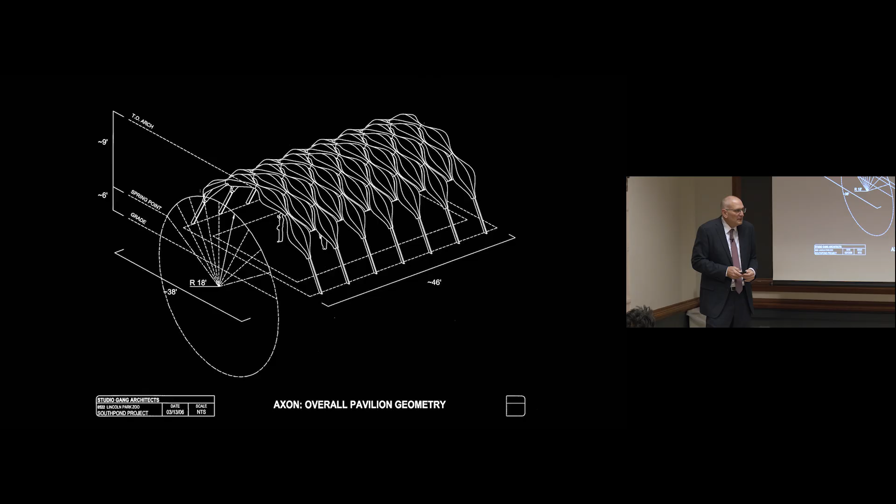She said, I want to build this picnic pavilion. I got this idea of this little arch-shaped shell. This is what I want to do. And we said, okay, fine. So we started doing some analysis of this, and this is our first analysis model.

What you see in this is we tried to mimic the geometry she drew. But what we were discovering is there were kind of 2 major arches resisting most of the load, and all the other pieces were kind of going for the ride. We said, that's great, that's very efficient. But what it'll mean is these blue and red colored pieces, these big pieces here, will be big and everything else will be small.

And that really wasn't the vision she was looking for. She wanted everything to be kind of the same, all the pieces the same. All right, so we played around with the geometry. If you look at that, and then look closely at this, and then finally at that, you can see us playing around with the geometry, stretching it and making it smaller, playing around with whatever shape you want to call that — ace of spades. That shape to this shape to the final shape, to where now the stresses in these pieces are all very similar, so now all the pieces can be identical.

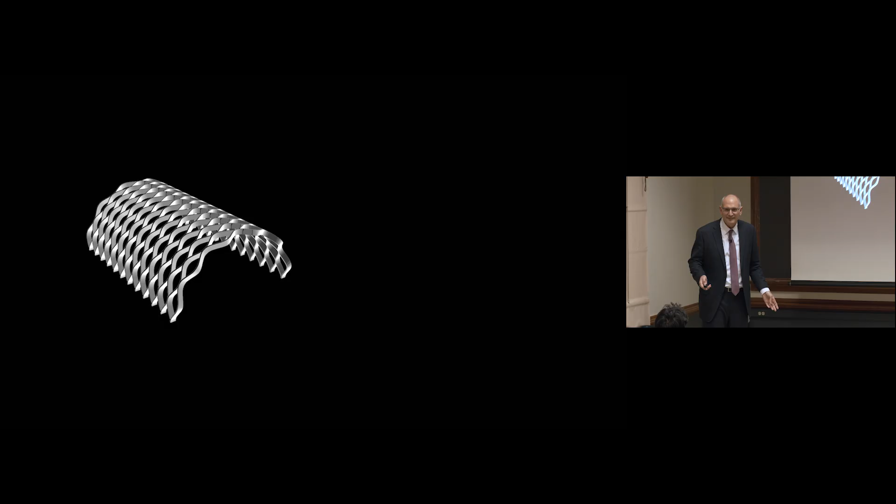Good place to be. So here we are, beautiful. We made a computer model, she made a computer model, we're all wondering at our computer model. It's beautiful. And then the question: well, how do you make that? Because you wanted to make it out of wood.

Well, wood in buildings before this had never been bent in 3 directions.

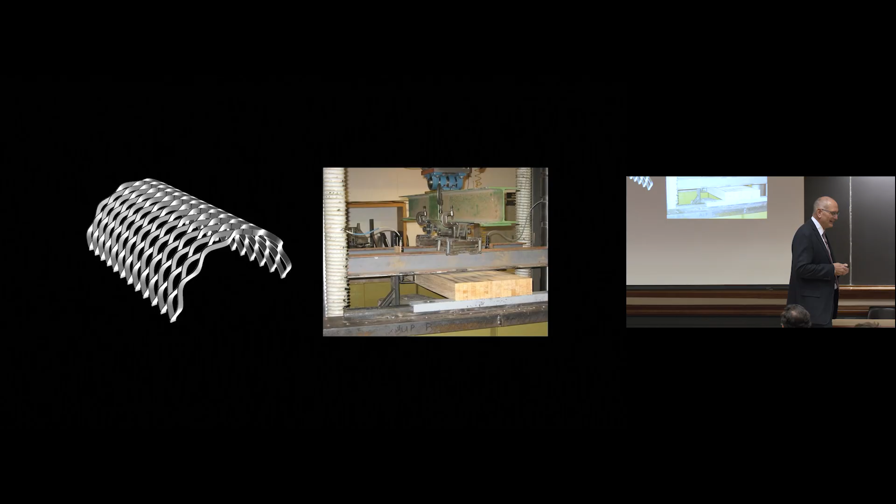Bent in 2 directions, but not in 3. How do we do that? We actually had to go in the laboratory and start experimenting and breaking things and making beams and trying to figure out how to bend wood in 3 directions.

What we ended up with is first we went and talked to boat builders. We were thinking, people who make wooden boats, they surely know how to do this. Initially they were very enthusiastic, and then they said, no, we don't know the 3D thing, we can only do 2D. When you think carefully about it, yep, in boats, the hulls of boats, wood is bent, but it's in 2 dimensions, not 3. And I thought, wow, that was a strikeout, now what?

Anyway, fast forward, we turn to furniture builders. And furniture builders build at a much different scale, like a table, but they know how to bend wood in 3 dimensions. That's brilliant. How do we take what you know, combine it with what we know, collaborate, and make something that nobody's ever done before, which is what we did. And so that thing you're going to see here in a minute in its finished state, in the end, is 3-dimensionally bent wood. To make that entire structure, there's only 3 unique pieces.

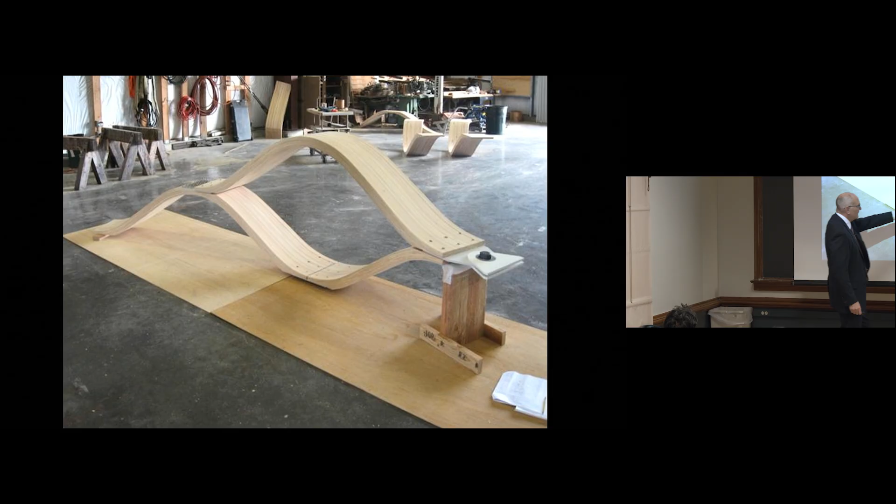This piece is piece A. This is piece B, and that's piece C. If you make those 3 pieces over and over and over, and you attach them together just right, you make that building. And that was the beauty of this. It's so very simple, but it looks so complicated.

Then Jeanne said, well, I got another challenge for you. I don't want to see these big gnarly steel plate connections. I want to hide them because I want it to be all about the wood. So we borrowed from the past. This isn't anything we cooked up, this is from like the 1800s. It's called a spike plate.

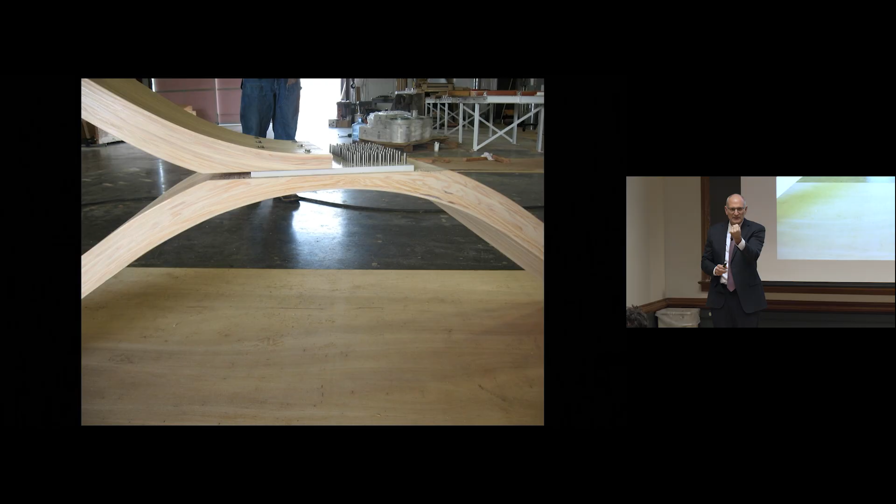If you take a steel plate and put all these little steel knobs on it, and then press the wood together, those knobs bite into the wood and lock it together. So that's what we did. The bolts you see out there in the field are just there to keep that thing held together. The spike plates are doing all the work, the bolts just kind of keep it clamped together.

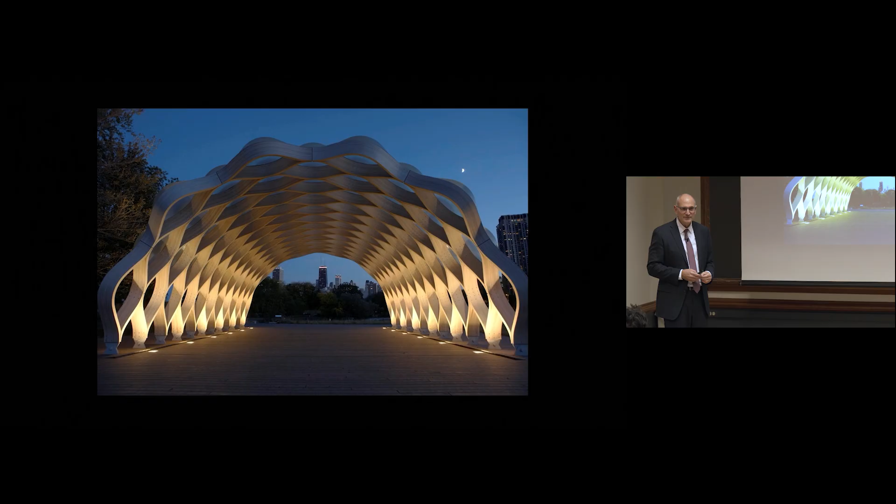It's very easy to put together, only 3 pieces, only some hand tools, a couple wrenches, voila, there you go. It's been on the cover of magazines, this thing. It's miraculous, it's beautiful. Lots of people go there to have their wedding pictures taken. Anyway, go there, it's another cool thing. All right, I got 2 more, and then I promise I'll be done, but they're too much fun, right?

Because physiology tells you if you're in an oxygen-rich environment, your brain works better. So for all his really smart people, he wanted them to go have their coffee break and get smarter. That was the concept. How do you do that? So he says, I want to take a historical conservatory, like a British conservatory, and I want to interpret it in a modern way. How do I do that?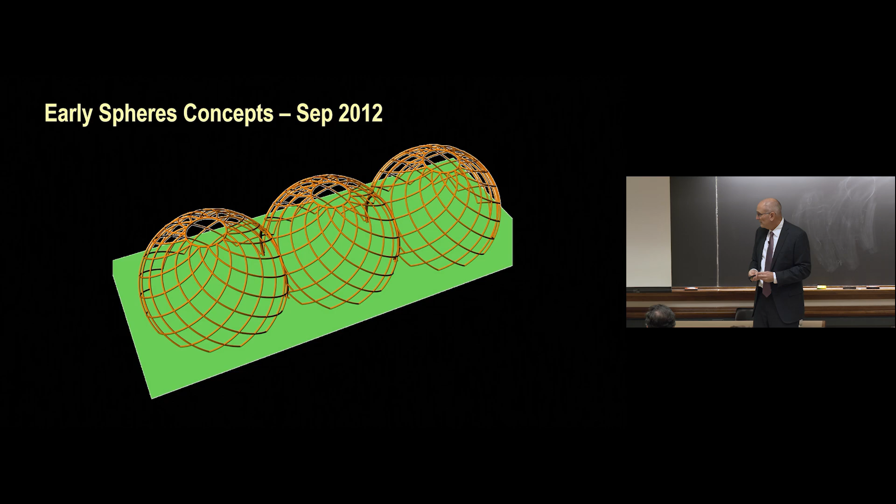Well, we start sketching and doodling and start making some computer models. This is in 2012, so this is a while ago. Yeah, more interesting. Yeah, still not doing it for me. It looks too much like something I already saw before.

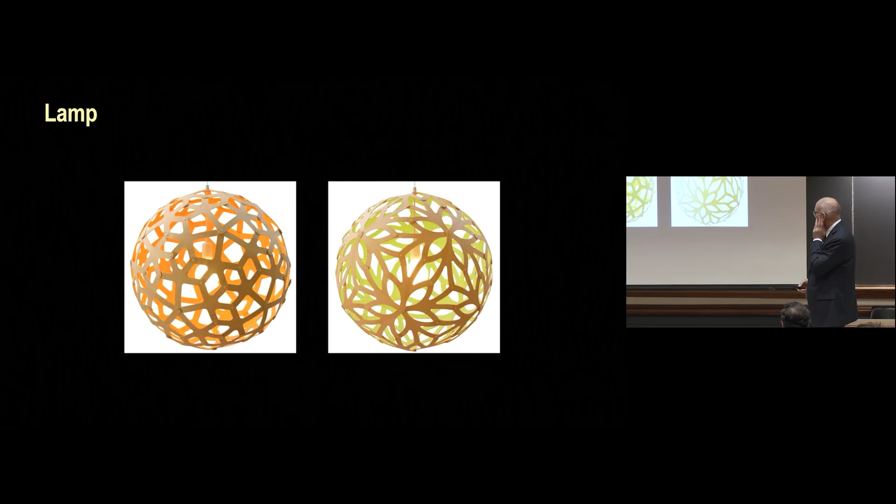One of our junior staff members went with her visiting mother to this store called Made in Washington, a gift store for buying trinkets. They had this lamp - you've probably seen it in the same store. She took a picture of it, brought it back to our studio and said, I think it might be this. We said, that's brilliant, I think you're right. And that lamp relates back to math and science - there was a mathematician named Catalan.

He developed the description of geometric solids. Amongst the different geometric solids that he categorized, Mr. Catalan cataloged something called a pentagonal hexecontahedron. Bullseye! That's what we need, a pentagonal hexecontahedron.

What the heck is that? All right, it's a soccer ball with 60 sides - hexa, 60-sided soccer ball made of pentagons. That's our structure. It's brilliant.

Only there's one problem. At the scale we're talking about, we want the soccer ball to be about 120 feet around. So you do that, and then you decide how big these pieces are. They're pretty long, which means they get pretty big. And the architect of this building, NBBJ, says, that's lovely, but the pieces are too big. We want them smaller, more delicate. How do we do that?

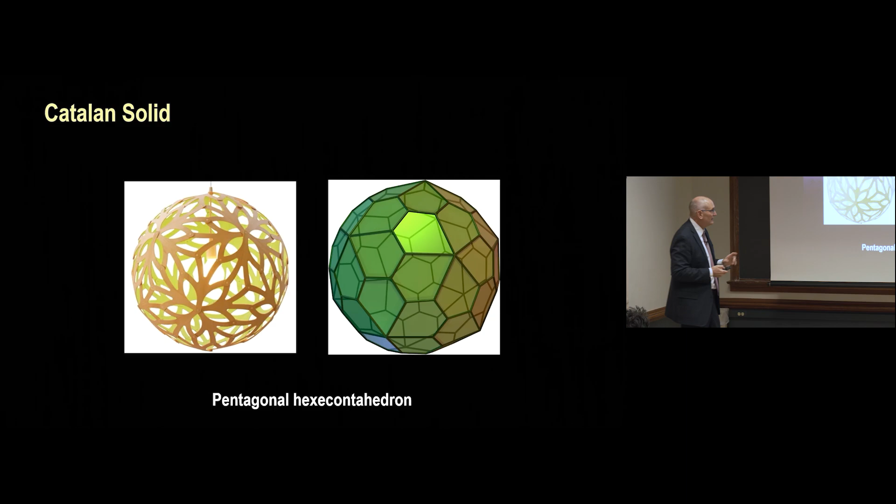So we had this idea - we'll take our pentagon and reinforce it somehow, stabilize it somehow. So we did this parametric study of all these ways you might fill in a pentagon. If you look closely, all of these are pentagons with something inside meant to stabilize it.

At the end of the day, with the architect, the fabricator, the erector, and ourselves, we settled on this one. The pieces were nice and delicate. The architect was happy. The fabricator could bend and shape it easily. The structural engineer was happy because it satisfied stability and strength. The contractor was happy because they could build it.

So what do you do when you come up with something like this? You name it the Jedi Fighter. So there's our pentagonal hexecontahedron - there it is in reality, and there's the Jedi Fighter.

So if you go to Seattle, now you have two reasons to go - the library and the spheres. You can go show all your friends, you know, Luke Skywalker used to fly that. And there it is, the mock-up, and then we build it. There are 40,000 plants inside of it, and there's only a small area where the public can go, because it's for the Amazonians to have their coffee.

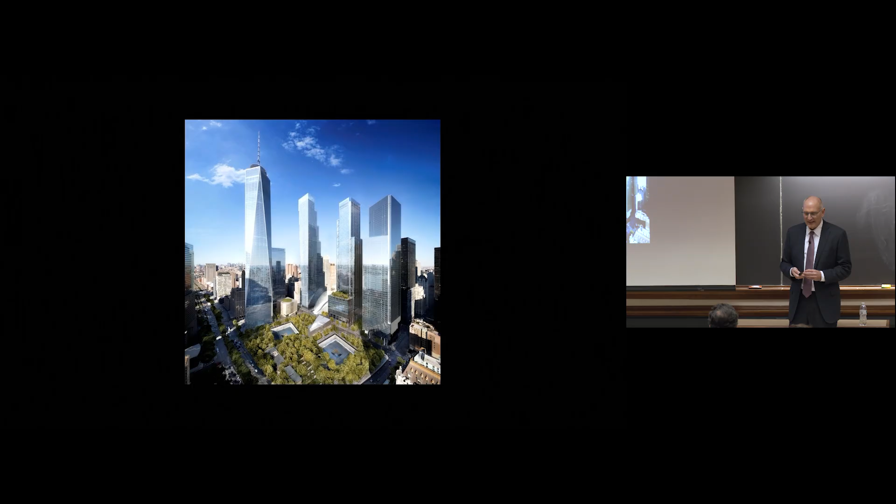All right, last one. Back to Josh Ramus, our dear friend - the Perelman Performing Arts Center in New York City. This site was one of the last sites to be developed at Ground Zero. Where it sits, WTC 1, One World Trade, the big tall tower, and our site was right there, right next to it. So a particularly important site for all kinds of reasons.

Site sits right there. Way back in the beginning, 2004, about 22 years ago, the Perelman Center hired Frank Gehry. Frank Gehry came up with a design similar to the Dallas project, where it was a small site but they had a very ambitious program, so they wanted to stack the theaters on top of each other. This was about a 20-story tall performing arts center with one theater stacked on top of the next, on top of the next. Frank designed this.

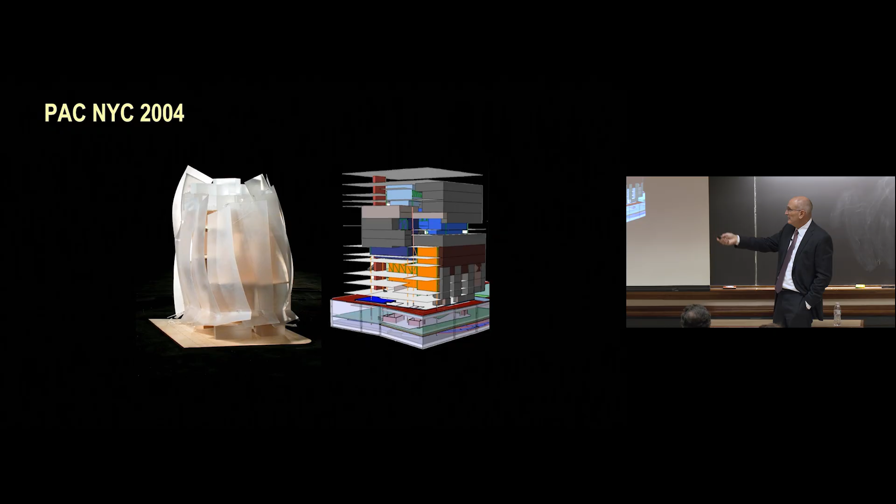We worked with Frank, we designed it, and we actually had to figure out how to build it over the top of the railroad tracks - once again, here we are building on railroad tracks - and figure out how to shoehorn this thing into that site and hold it up in this very difficult location. There's the railroad track, so the building wanted to sit on top of that. So we did - we figured out how to put that building there.

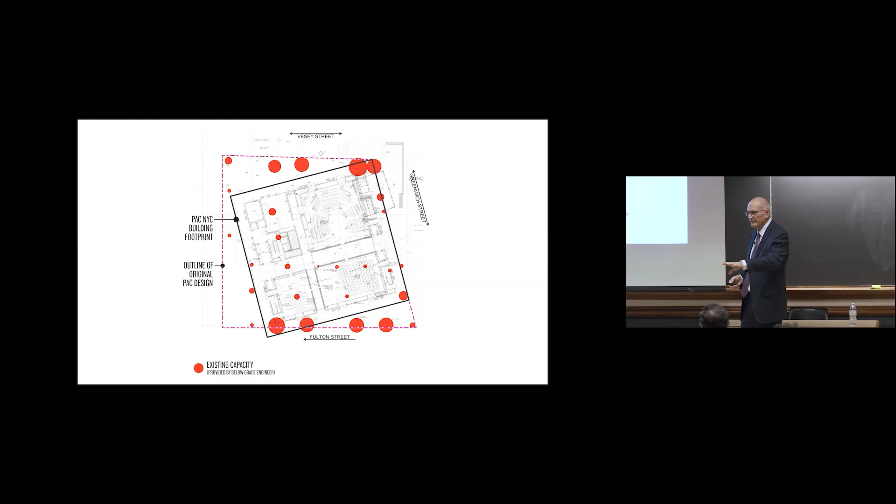We ended up touching the ground in these few places where those red dots are, where we could squeeze things in between the railroad track. We designed it and we built it - stop. We built it back up to grade, to street level, and then they ran out of money. Full stop. It sat there for almost 10 years.

Nothing happened. So 10 years later, now it's 2015, Michael Bloomberg shows up with a bag of money. He says, we've got to finish that theater. I'll donate the money. Let's do it.

So they did. But they had a new architectural design competition, and many architects competed for this, Josh Ramus being one of many. The idea was, how do we put a downsized version of this theater on that site that's already half built by Frank Gehry?

So this is what Josh said when he was finally awarded the project. If the site were not the absolute right place to build this, it would be the absolute wrong place to build this, because it's so freaking complicated. Between the complications of its proximity to the tower, its location over the railroad tracks, et cetera, so many things made it very difficult.

And now we've got to figure out how to do this stacked programming. But Josh, taking cues from what we learned on the Dallas Wyly Theatre, said, here's his early sketch. We're going to make a building where not only do the seats move and transform like Dallas, the entire building insides are going to transform. The walls are going to move. The stage is going to move. The seats are going to move. And it's going to reconfigure, again and again. That's the big idea.

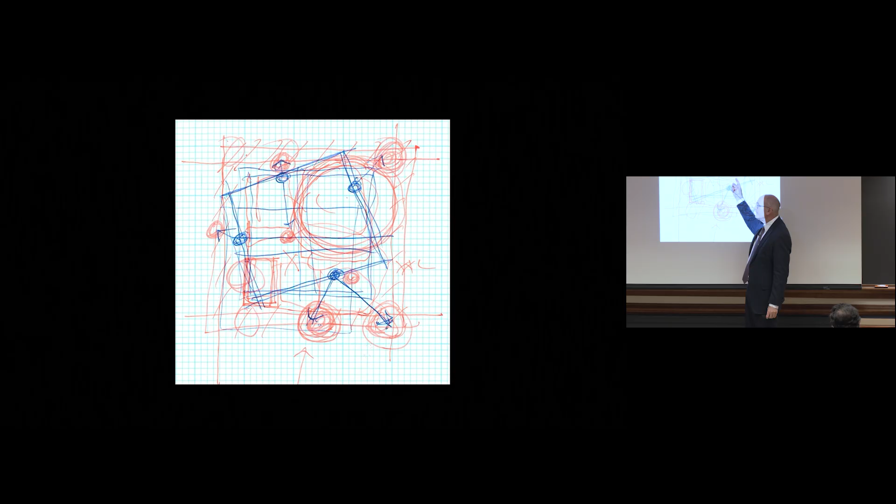That's my sketch. Very tidy, isn't it? And this is me sitting with Josh trying to figure out how we're going to put his building, which is the blue one, on Frank's building, which is the red one. How do you marry the two together? This is us scribbling, trying to figure that out.

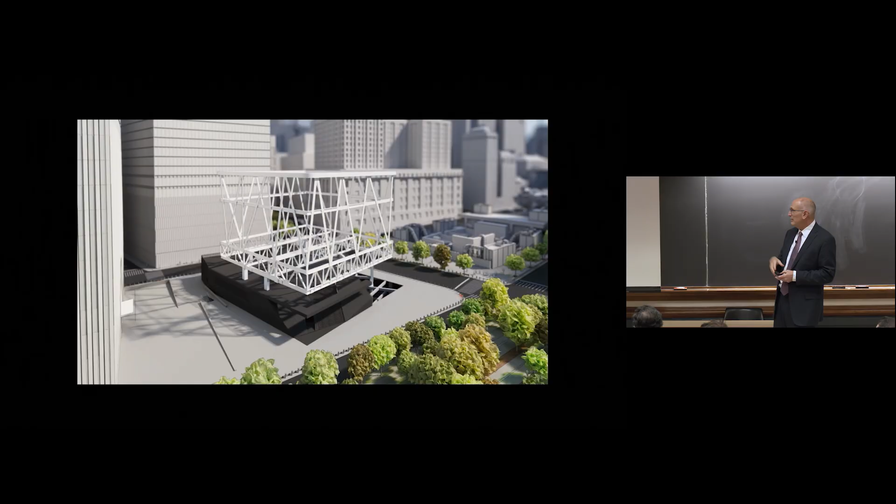So there's where we got to touch the ground. Once again, we're going to put Josh's new building on top of Frank's old building, and we got to marry these two together, stitch them together somehow. And then we got to build this cube where inside, everything's going to move. On the outside, it looks very simple, but we create this structure, this volume with the structure, a very simple shape. Inside, everything's going to be super complicated.

To make matters worse, we're over the railroad tracks, and this is intended to be a performing arts studio, not just one, but many. So the trains are rumbling by down below, and they transmit vibrations up through the building and, on a bad day, into the theater and disrupt the performance. That's bad. So we got to fix that problem too. So how do we do that?

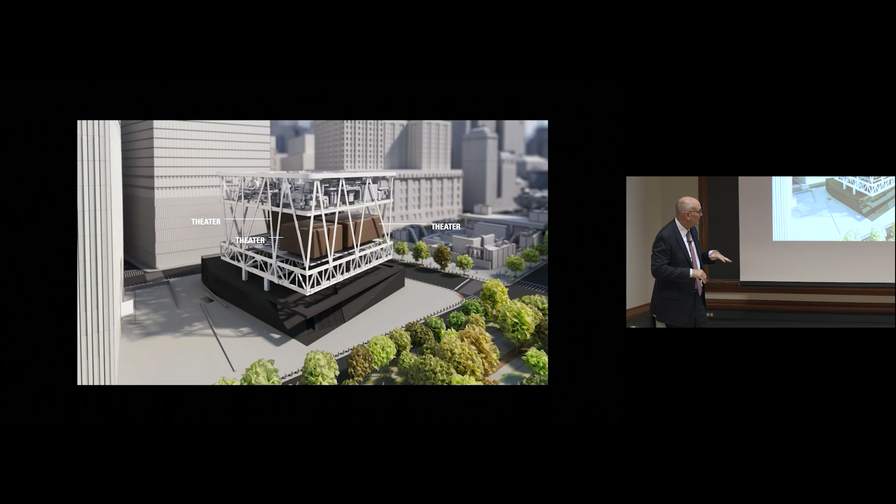It's not completely clear in this picture, but I'll try to describe it. That is the ship, and that's the bottle. This is a building inside of a building, and that inside building is sitting on top of a whole field of rubber isolators. These boxes, which were the theaters, sit on rubber isolators that isolate them from the train below, and then we clad the whole thing with a nice, very pure cube form. There's the isolators, big pieces of rubber.

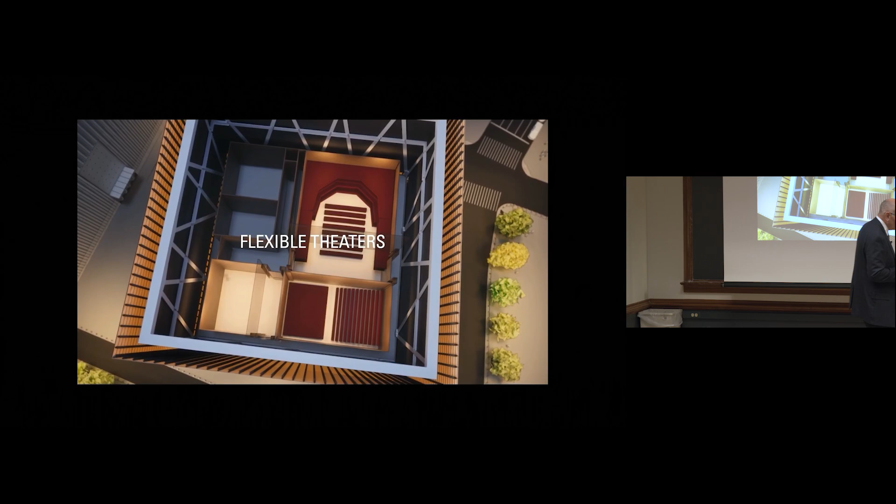And here's how that theater works. The theater and the staging and the walls can be reconfigured in 60 different configurations. You can have up to 3 simultaneous performances going on at any one time, or one big performance and variants in between, from 450 people seated, to 500, all the way up to about 1,000 people seated at a particular performance, by not only moving the seating but also using acoustical wall separations we call guillotine walls. The walls go up and down like pieces of a set on a theater performance, but it's a big acoustical separation wall that's hung from above and is raised and lowered to create the space.

It's the most complicated building I've ever worked on. It is very much a Swiss watch of a building. So we went and we built it.

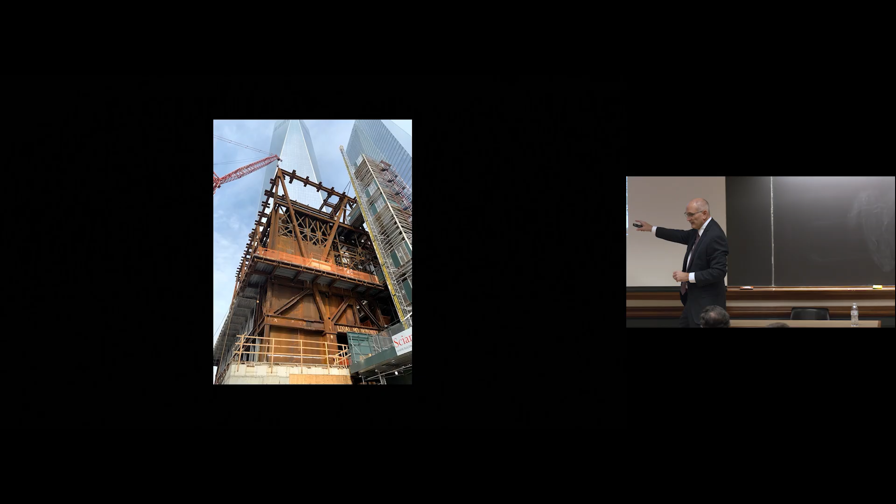You see some steel plates here, another complication. We're next to One World Trade, and we got to think about all kinds of unthinkable things, and protect the people inside from bad things that might happen outside. That whole cube is surrounded by steel plates, to keep the people inside safe.

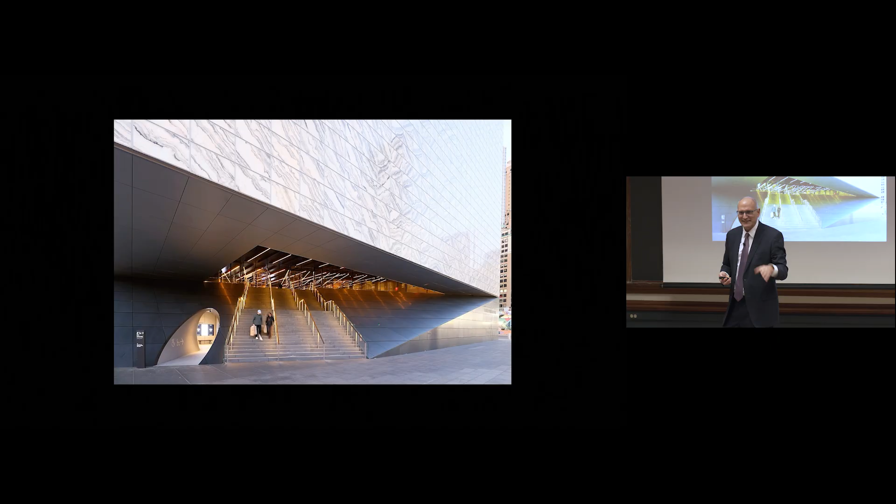The rigging, the lighting, all these things move, and it's incredibly complicated, but ultimately very brilliant and very beautiful. So if you go to New York, that's another place for you to go. They do have regularly free performances in this venue, so you don't have to pay $500 a seat every time. That was part of the idea of the whole place, to go and see things. It's really quite a beautiful piece, very simple from the outside, massively complicated on the inside, a product of these collaborations and these big ideas that we have together.

Anyway, enough stories for me for today, I hope you enjoyed them. But remember, the caring and the trust is where it's all rooted. We care about each other, we listen to each other, we trust each other, and that's the basis of the collaboration. And then we both have big ideas, and it's great fun. Anyway, I get to do all this stuff. It's my life, it's fantastic. That's it, thank you very much.

Really spectacular, thank you very much. Questions? Yes, I have two questions.

You said to stop the vibrations from these trains going up, you guys used rubber. Could water also have been used to dampen the vibrations there? So the question on the Perelman was, can you use other materials besides rubber, like perhaps water, to dampen the train vibrations? The simple answer is yes, but we didn't.